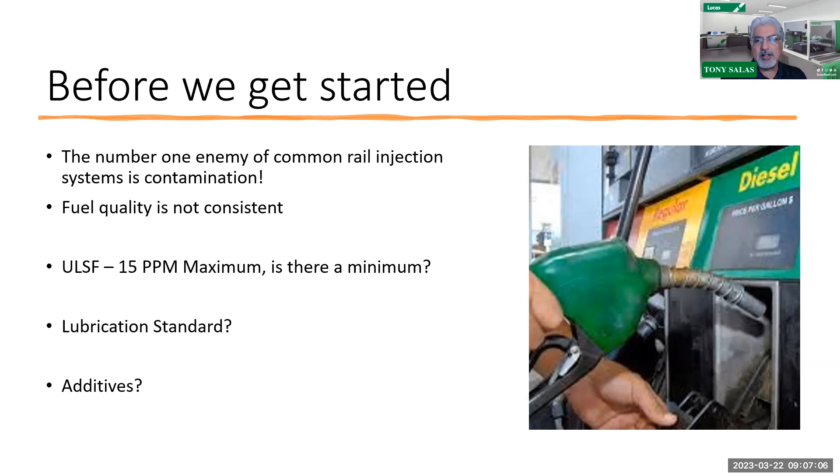When I get phone calls, I know pretty much everybody all across the United States, and it's amazing how one specific area will call me. It's been a while, but they'll call and say, 'Hey Tony, what's going on with these pumps or a certain injector?' It turns out it seems like a regional problem where fuel can be the issue. So take a look at your fuel quality. We have a specific gravity tester here where we test the specific gravity of the fuel. It's a good amateur test to get an idea if there's extensive water content in the fuel itself. So you come up with your own ways. If you want more information about that, let me know.

But very important to understand that fuel and contamination is an issue with the common rail system.

So when we look at the common rail systems we'll be discussing here, I only have so much time to discuss a whole bunch of systems, but we'll try to go through them.

Obviously, the first common rail I was born with is the LB7. I'm not going to lie, it's always been GM Duramax. That was my first. From there, we took the information from LB7 and carried on some of the test procedures, some of the things we can do.

In this case, we saw the common rail introduced in the '03 Dodge Ram on the 5.9. Then for Ford, we saw the 6.4 use a Siemens common rail. So Ford did not come on board with common rail, for trivia purposes, until '07 with the Siemens common rail. That only lasted a few years, 3 years. Then in 2011, Ford went with Bosch piezo common rail injection, but it was a piezo, unlike what we saw with the Duramax from LB7 all the way to LMM.

We saw them using a ball and seat injector, then they went to piezo in 2011. That's what we see with the LML Duramax. And obviously Duramax, as we discussed on the previous Lucas sponsored webinar a few months ago, we talked about the L5P Denso common rail. So in this case, we saw the L5P Denso common rail.

So a lot of changes, but when I look at a common rail system, it's all relatively the same to me. What I mean is there has got to be some kind of fuel supply - the fuel tank. We got to get fuel to the common rail injection pump, which pressurizes the fuel, moves that pressurized fuel towards the rail, and finally to the injector itself. The final destination is to be injected into the cylinder itself.

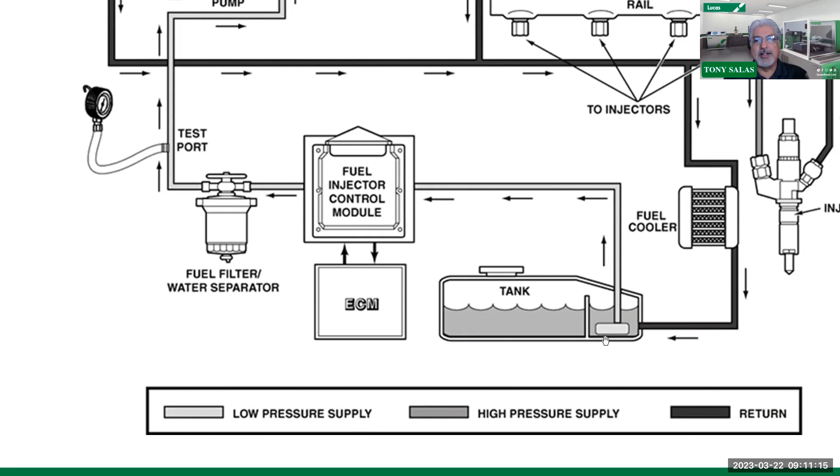Because if that filter's readily getting contaminated already, that means that we definitely have some debris in the tank. And those of you that work with the agriculture community probably know that it's amazing how even these tanks can get full of hay. So again, the fuel tank is very important.

So as I move around here and I look at the common rail system here, we see that we have our injection pump. And like we saw with the LB7, the CP3 pump was the injection pump at that time, used extensively through the years. And therefore, at that point, we saw the fuel going towards a junction block where we saw the pressure limiting valve and the fuel rail pressure sensor.

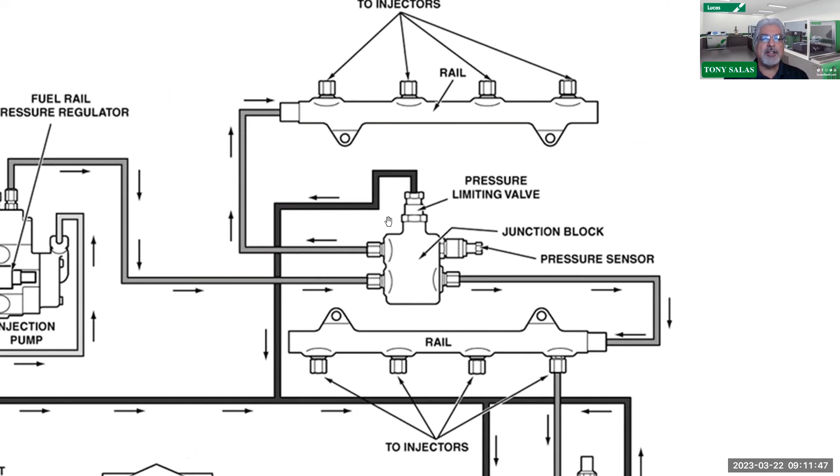But as time went along, we saw a change going on to that. But regardless, we saw that the pressure was distributed to each common rail itself. So the purpose of the common rail was, in essence, to provide the same amount of equal volume and pressure going to each individual injector. But we know that not all the injectors are working at the same time. It's one at a time, following a firing order.

So therefore, yeah, we did a lot of basics here. So bear with me. I know it's kind of basic what we're talking about, but we tend to misunderstand, some of us that are novice technicians that are not fully experienced, that we have a suction side, we have a high pressure side, and we have a return.

So the first thing we struggled with back in the day was, what happens when the truck comes in with inadequate rail pressure? There's not enough rail pressure. And in this case, it wasn't always the pump. It still happens to this day, because I talk to rebuilders from time to time, and they see quite a number of injection pumps come in, and the pumps are fine, they're just dirty or contaminated.

So the question begs, when the truck comes in and it's got low rail pressure, an apprentice style technician, or somebody who doesn't have experience with common rail, tends to want to replace the pump. But the pump does not fail as much as we think it does, depending which model we're talking about. It does not build any rail pressure, but they tend to forget that it must be built against the injector. So you're going to build rail pressure, you got to push it against something.

Now, when we look at literature from the Power Stroke 6.4 with the Siemens Common Rail, they were talking about disconnecting a line to see if there was contamination. So again, it goes back to that contamination not being just metal, but also other debris that might be in the common rail system.

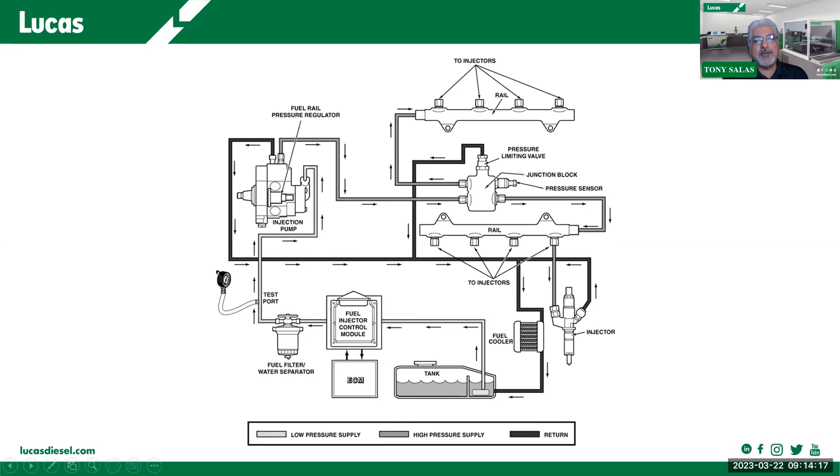But regardless, Duramax was known for the longest time to use suction all the way up to the LMLs. But when the L5P came out with the Denso common rail system, they added a lift pump. So therefore, Duramax was the king of suction, I guess you can say. So we were using this gauge to actually measure suction.

But since we're sucking fuel, one of the key elements that I still see from time to time on Duramax applications is the fact that the fuel cap is rather unique. In this case, you'll notice that this fuel cap is actually venting the tank at 1 inch of vacuum. So therefore, if we're pulling fuel, it is possible that we create a low pressure in the tank.

So what can happen is that it collapses. From time to time, I'll look underneath an older Duramax and I will see that the creases of that composite tank tend to be moist. And that's because the tank has been contracting, expanding, contracting, expanding.

But when it contracts, it's because it's drawing so much suction that in turn, it actually builds a vacuum in the tank. So the cap is supposed to be specified to open at 1 inch from GM itself. So the problem is when you put a locking cap on, many of them don't meet that specification.

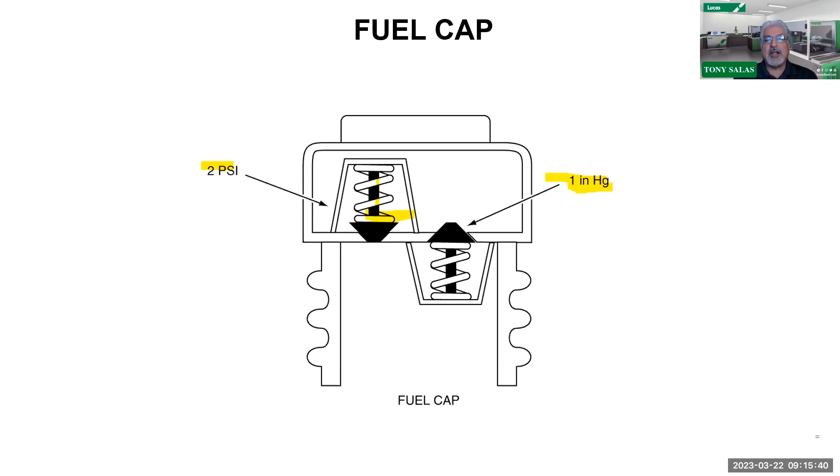Then on the opposite end of the spectrum, we see a return coming into the tank. So in turn, we build the pressure into the tank, which again can actually go up to 2 psi. So I guess what I'm trying to say is make sure we have the correct cap on these Duramax applications. Very important to understand.

But then as we move along here, we saw that the weakness of a Duramax also, again, from LB7 all the way pretty much to the LMLs, was this hand primer pump. And I've been teaching for years that, in the past, in the early years, we were talking about putting a clear hose, because even GM and their service procedures wanted you to put on these lines a clear hose to see if there was bubbles, if it were aerating.

But one of the tests that I found out is that, well, most of the time, not all the time, but most of the time we see that this hand primer pump will actually kind of be aerating the system and lose prime. It'll be one of those situations, you park the truck after some driving time, and then you'll come back 10-15 minutes later, you try to start up the truck and it won't start, and you have to prime it to get the truck running.

So that means we're losing prime there. So in many cases, what we do is we actually put a vacuum on this outlet tube. So here's the inlet coming in, then you got your outlet. And what we do simply is we actually get our vacuum pump adapter with the little container so we don't suck fuel into the vacuum pump. But what we do is we put it in a vacuum and see if it holds vacuum. And if it does not hold vacuum, then probably, or most likely, the issue is the primer pump.

And like I mentioned before in previous webinars, I no longer rebuild these anymore. It is cheaper to buy the whole assembly. Many vendors sell it, where it even comes with the filter, the water in fuel sensor, and the plunger pump. So a whole new unit. So I don't rebuild them anymore. Even though they still sell the rebuild kits from many different vendors, I'll just understand that that is a hot spot when it comes to losing prime.

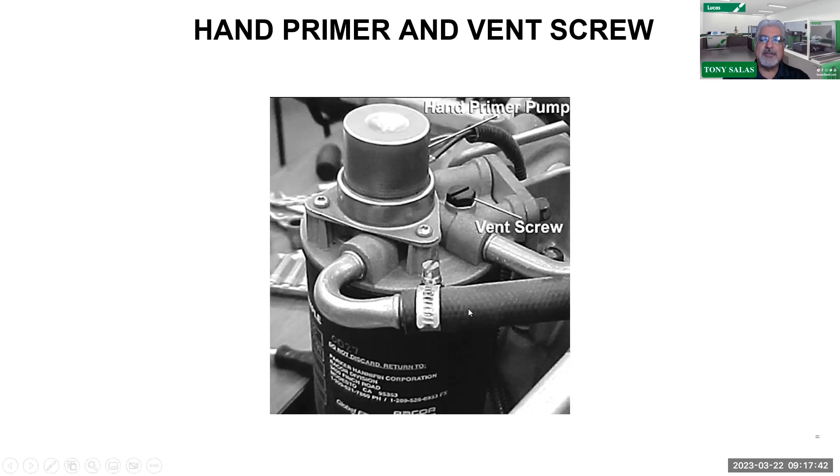Now, do me a favor though, in any Duramax application, especially from the LB7 to the LMLs, make sure you check these hoses. These hoses get old in time, and it's time to call your local GM supplier or whoever sells these hoses and actually go replace these hoses if necessary, because they can also become brittle and actually start to come apart on the inside. So definitely keep an eye on those hoses.

Now, as we see on later model Duramax, you're going to see that they're using a vacuum switch. So again, we're actually monitoring that suction. So too much suction again will mean that we most likely have a restriction.

Number one tends to be the fuel filter, but it could be other components. We could have a restriction on the pickup inside the fuel tank, but in this case, like I said, this tends to be the issue with the fuel filters.

Now, I know there's a lot of aftermarket fuel filters being sold, so since I'm not a GM person, I can say, hey, there's the CAT adapter, there's the dual filter adapters that you can get from FASS and other manufacturers, and AirDog. All I'm saying is, I believe this vehicle is under-filtered. When you look at the surface area to do water separation and filtration, we're asking a lot out of the stock filter from Racor. So it's a good idea to actually put a supplement filter if possible.

Now, I'm not going to lie to you, since we were talking about suction, when it comes to the LMLs, I will be honest, if I have a catastrophic CP4 failure on those, we will go ahead and add an aftermarket lift pump. I have my favorite, but in this case they do sell bolt-on pumps, ready to install just the pump. I don't need to install a big assembly, which is a high-dollar filter aftermarket assembly, but a good pump itself will suffice, and that could be in the neighborhood of $400 to $500. It's a lot cheaper than having to buy those big units that can exceed over $1,000.

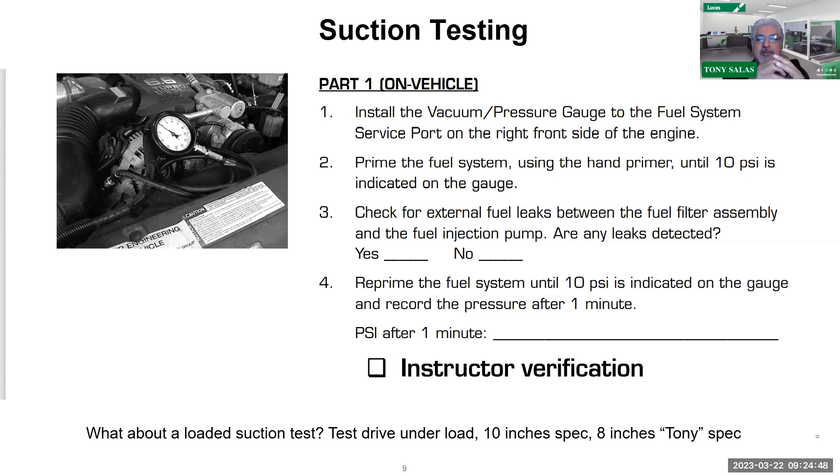Top kick Kodiaks, those early model top kick Kodiaks were notorious for that, where you pull the pickup, and they weren't using a pickup sock, they were using a plastic pickup container with holes in it. We literally had to drill holes on that plastic pickup because it was actually restrictive from the factory at that time. I'm sure there's still quite a few of them out there that even have trash on them.

But then on all these Duramaxes, all the way to LML, you're supposed to do a total suction test. On this LB7, they were telling you that you can disconnect, you can just leave the key off and run the starter if you want to do that. In other words, keep the key off, get to the starter relay right there in the engine compartment, and you can use one of those relays with the button on it.

And what I do is I will crank the engine with the key off, and what I'm trying to do is a total suction test. And what I'm literally doing is pinching the line that goes between the outlet of the fuel filter and the injection pump.

There's a line right there on the outlet line. I'm going to pinch it with some crimp pliers, and what I'm going to do is see what the total suction is, because I'm putting a major restriction with the crimp pliers, and at that point, I'm measuring the total suction, which should be minimum 15 inches. Some people say 10 inches. No, I get 15 inches. That's what you want to see.

So that'll tell you the total suction of that primer pump that sits behind the injection pump. That's what step number 7 is saying, is go ahead and restrict that line and crank the engine over and see what you get. So again, total suction test is what you want to do there.

So once again, we started off at idle, crank the engine, you start up the truck if your truck has a drivability problem, or a rail pressure code. And what you're going to do is you're going to measure again the suction, 4 or less. Then you go ahead and do a loaded test, 8 inches or 10 inches, whatever you want. And then you got your total suction test, where you're going to restrict the line on the outlet of the filter and see the total suction. How well does it suck? So this will be a crank key off situation that you're going to do.

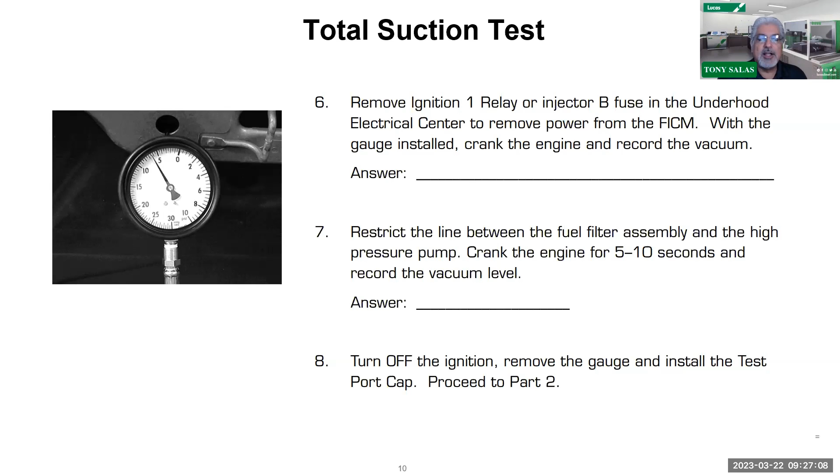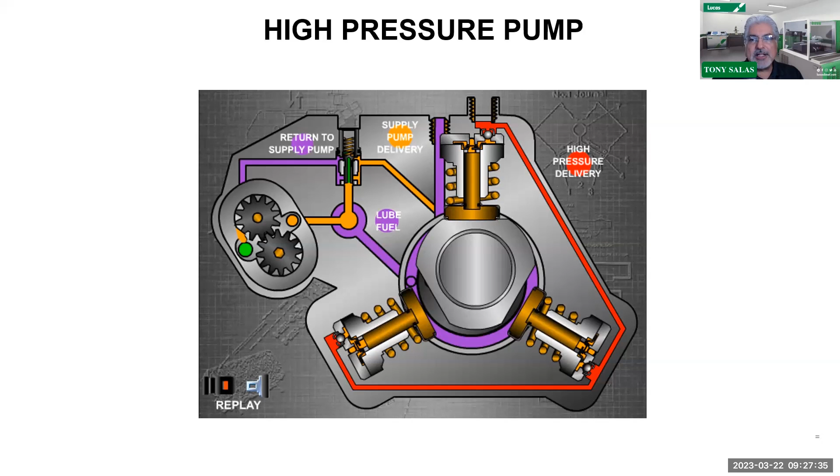So remember, there's got to be something that lubricates these CP3s, whether it being an LB7 Duramax, LLY, LMM, or even a Cummins 5.9 and some 6.7s. So the cascade valve maintains pretty much, as you can see here on this old slide, there's got to be lube fuel there, and that lube fuel has got to be maintained by the cascade valve. So that controls that flow.

So here you can see an early model CP3 pump, and there you can see the cascade valve. Unfortunately, on a Duramax application, it is not easy to get to. It is faced towards the passenger's head. So literally, if that's your issue, you're better off just replacing the injection pump. But on a 5.9 or 6.7 Cummins, yes, I can get access to them and I can actually replace them. So I am guilty of returning some cores without a cascade valve, because I'll steal them off of some normal good ones on some cores that I return.

But they do sell them though. The cascade valves are available by themselves.

Now, I got to be honest, for a lot of years in the early years, back in 2010 or earlier, we used to do injectors and stuff, and we never replaced the rails. But after some time, back in the day, we started sticking our borescope into the rails, and it was just astonishing how much rust and crud there'd be inside the rail. So we inspect the rails, but for the most part nowadays, on most applications, we actually replace the rails too. So if you're one of those guys like me that didn't replace those rails, it's a good idea to inspect them at least, because there are orifices inside of these, especially on the Bosches. You're going to see that there's an orifice, and that orifice is a dampener for that pressure inside those rails, and they can actually get dirty or clog.

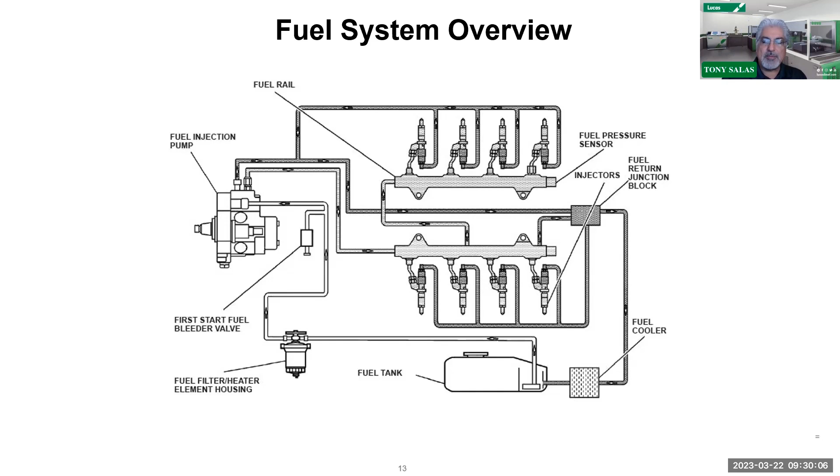I just got a phone call about 3 months ago, back in January, from a guy who was perplexed because he couldn't understand why one side, when he did the power balance, was way weaker than the other side, and the truck had power problems and a very low boost. I told him this might be a long shot, but take that rail off the driver side and inspect it. Sure enough, he sent me pictures, and it was clogged. Being that it was a 2002 truck, that's almost 22 years of debris accumulated in those rails. So always remember, the age of these common rail systems could be a problem.

Now, the fuel rail pressure regulator has many names depending who you talk to, whether it's an FCA, an MPROP from Bosch, or FRPR from Duramax. But this is the guy that controls the rail pressures, which we often call the volume control valve. It's a wise idea to understand how these things work, because they're pulse width modulated by the computer on the ground side, so they work on a pull-down circuit. It controls the fuel supply to the plungers themselves to generate the rail pressure. So we see our fuel supply pump to the high pressure plunger. It's a volume control.

But let's not forget, guys, that this is a great tool to inspect how your fuel system is, how clean it is. So from time to time, we take them off, like on a 5.9 Cummins, and we'll see if they're full of debris or what's going on. But the most important thing I need you to understand is that all fuel being delivered to the cylinders must go past this fuel pressure regulator. So all of it must go past it.

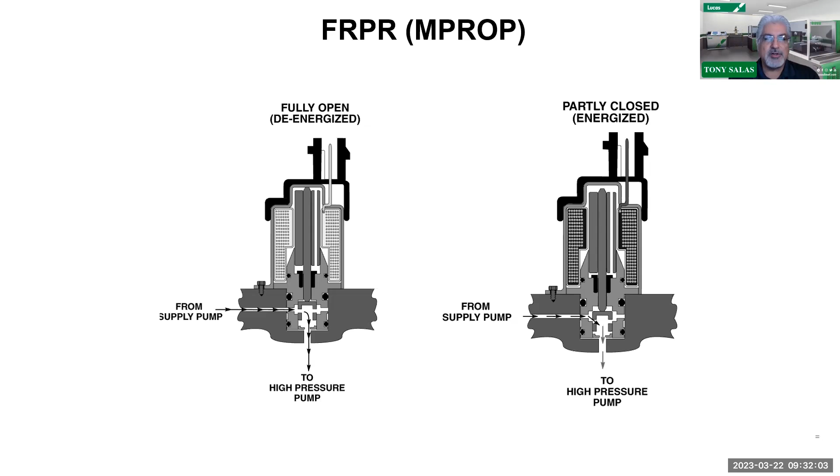One of the key things we talk about when you diagnose, and other instructors have talked about too, is look at your duty cycle of your FRPR or FCA, whatever you want to call it. The magic number was somewhere around 30 percentile, so you want to be in the 30 percentile region, 32, 34%. You could look at that percentile when the engine was at operating temperature running, and that would tell you the duty cycle of this guy, because if it was too low, he's having to deliver more fuel, which means you possibly have excessive return. So it's a good preliminary telltale to tell you if this fuel system was starting to see excessive return.

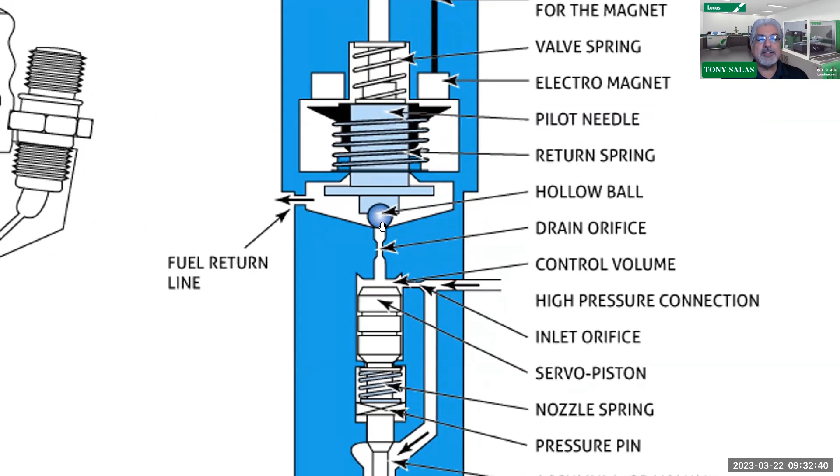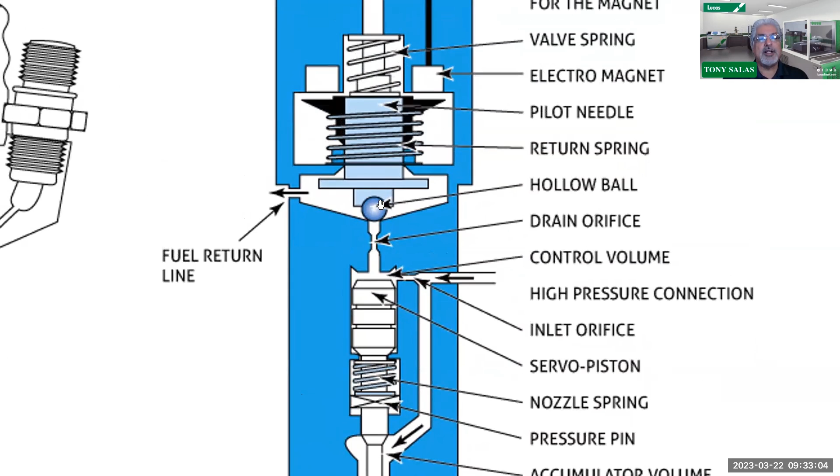Yes, I know about the orifices, but in this case, we also send fuel rail pressure to the bottom of this nozzle assembly. At that point, this coil or solenoid is going to be energized, and once that coil is energized with a higher voltage, whether it's the early years 90 volts all the way to 48 volts, its only job is to solely unseat this ball. The ball is unseated, we create a pressure differential. So pressure drops because pressure is relieved to the return, as you can see here. So it's a pressure differential game on most common rail systems.

What moves the nozzle to open and close is actually the dumping of pressure above the nozzle. So how do we dump it? We go ahead and unseat the ball and it goes to the return. In the early years, we were having chronic problems.

We see it from time to time, especially with crappy reman injectors. That's why I tell people, be careful what you buy in today's common rail injectors, because you pay for what you get, because we don't know how well they're servicing that ball and seat. You've got to watch out for this, because we get ball and seat erosion. This is where that lubricity thing we were talking about, and contamination, can play havoc, because I feel the weak point of this common rail injector is the ball and seat.

So in this case, we're only trying to create a pressure differential where the pressure drops above the nozzle. The pressure below the nozzle is going to push the nozzle up and inject fuel. That's the way it works.

Now the question begs, if I have low rail pressure - now we're talking about Duramax and Cummins applications here, so we're covering a lot of territory when I talk about this - in this case, what I like to do, I'll tell you what Tony likes to do.

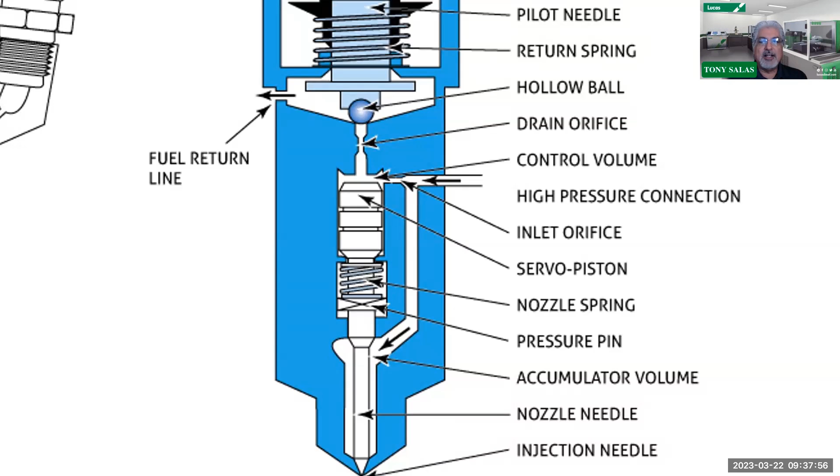What should happen is you snap the throttle, RPM should go up and then come immediately down. So in this case, if it takes forever to drop, a steady time to drop, that means you do have ball and seat erosion, because it's holding the nozzle open longer, which in turn is fueling longer. That's why, so that's what you're going to see. So just snap the throttle and see how fast it drops. If it takes too long, I'm almost 99.9% positive it's ball and seat erosion on those injectors.

So I know that for many, they're actually not putting these tubes in correctly and torquing the injector properly. So therefore we have some leakage there. So when I do a leak down test, they fail, and most likely it's not the injector sometimes. Yes, it could be the injector, don't misunderstand me, but it's actually the tube itself. So we've got to inspect these tubes to see what's going on—they're not correctly installed, they're cocked a little bit, or those injectors aren't torqued properly. So therefore, yeah, you want to inspect those tubes.

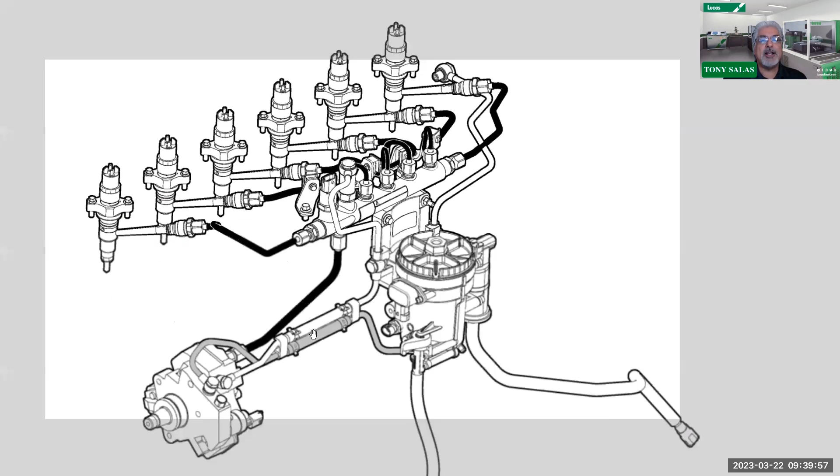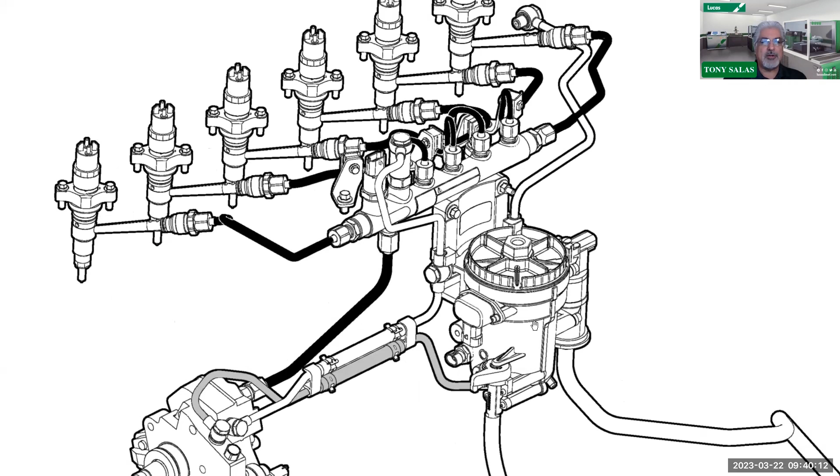But this is an early model 5.9, probably an 03 that I'm looking at, because right on the back side here—I don't know if you can see my cursor—that's the original lift pump location. The lift pump was originally on these trucks on the filter itself. Then with the change in filter styles and so on, they actually went with the pump in the tank. However, I have run into some trucks where the lift pump is in the actual chassis, somewhere on the chassis or frame. So it can be in one of three places depending on the years and model of these 5.9s, so they can vary location.

So what is nice about a 5.9, like I told you already, the Cascade valve is easy to get to on the injection pump itself.

Now I often get lessons from shops. I once visited this shop, and this old gentleman was working there. He's great, smart. We got along great.

We hit it off great. I actually had too many beers that day.

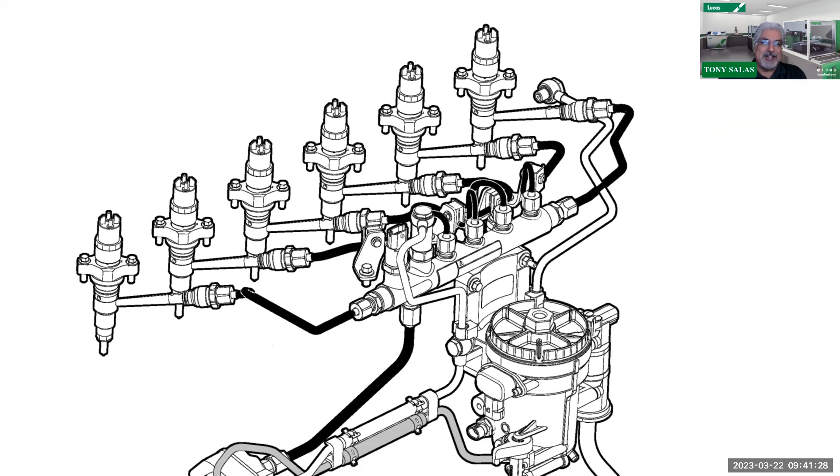I asked him, how in the hell are you testing these common rail injection pumps since you don't want training? He goes, well Tony, what I just do is I got an adapter for this banjo fitting in the back. I cut it up and put it to a hose, disconnect this, and put a separate banjo fitting to a glass of water through the hose. Then I disconnect this line and put shop air through there with my rubber tipped air gun. If I see bubbles coming out, then I know a ball and seat or a tube's leaking. I'm like, son of a gun, I guess that works. But now we got to figure out which one is the one that's leaking.

He came up with something good, because a lot of us are anti-return tests because it takes so much time and adapters just to do a return test. And even then, you got to cap it to see which makes a difference in your return flow. It's just too time consuming. So we're big leak down tester guys. That's what I teach in those diesel master courses we do. So again, be careful about that.

For those of you that never noticed, let me go back to my 5.9 here. For those not very fluent or new to this, note that the passage for the return and the tube are all in the same passage. That's why you're wondering, okay, if the tube is leaking, why don't I ever see it? Because it's going into the return, you'll never physically see it there. So food for thought there.

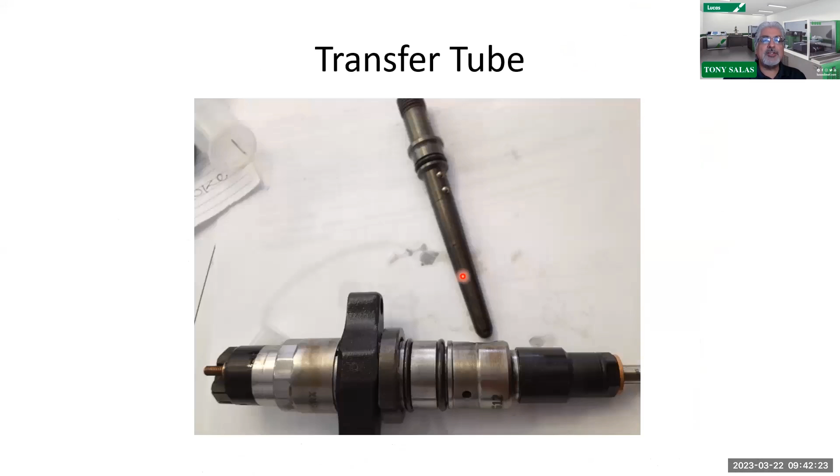So that's what you're going to see. Yeah, there we see our transfer tube going to the side. There's a return hole where the return fuel comes out of this injector.

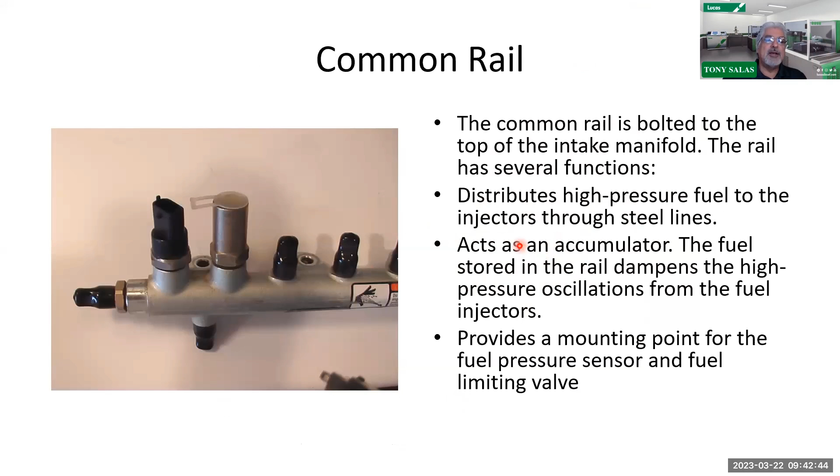Now the common rail itself, as I mentioned already, acts as an accumulator. Like I told you, there are orifices, especially on the ends on these early Bosch ones, where you're supposed to check the rail, see if that orifice is dirty or full of crap, because that'll affect things. But it is there as an accumulator. So please note that's inside the common rail itself.

So as I switch over to the Cummins 6.7, number 10 is the biggie because that tends to be an issue even to this day. I thought we were over it, but now we get them from time to time. Number 10 is actually your pressure limiting valve. You can lose fuel rail pressure right there at the pressure limiting valve.

In this case, I'm going to tell you what I do. I no longer replace them, I cap them. Different aftermarket companies like PPE and others now sell these caps, which are just plugs that pretty much eliminate the pressure limiting valve. Why? Because if the truck sees excessive fuel rail pressure, it'll be detected and it'll derate the truck or shut the truck off completely.

So they're just such a pain in the butt because of contamination. They will hang open and actually relieve fuel rail pressure during normal idle times or loaded times. It's not supposed to pop open so easily. In case you don't know what I'm talking about, these pressure relief valves were initially set to open around 27,500 to relieve excess pressure in case there was an incident where we had no control of fuel rail pressure. But like I said, the system monitors itself, it could shut it down on its own. Even if there was a fuel rail pressure sensor failure, it could still shut itself down.

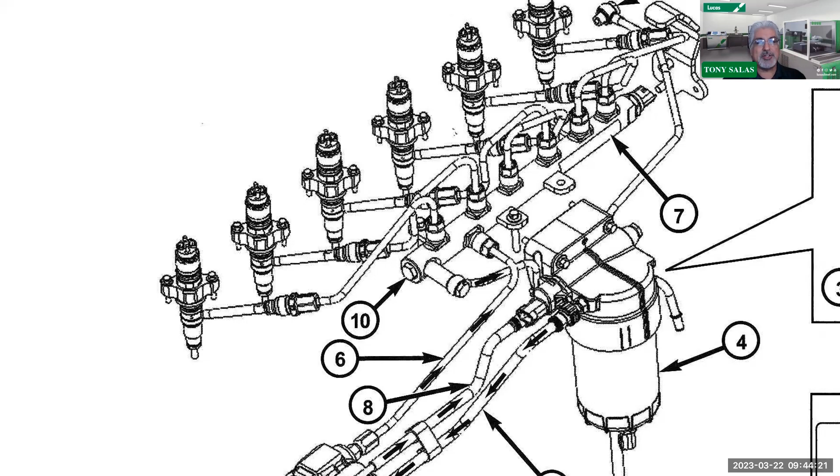So I'm pretty much a big believer now that I just go ahead and cap them, or in other words, plug them. I just put a plug there because of the issues we've had. And you got to understand, we have some customers that do poor maintenance, even though I'll yell at them and tell them to bring that truck in for maintenance, and they can't just let go of the truck because they need it so bad, but that happens.

So anyways, that's what we see. One of the things, if you work with Cummins on these Ram and Dodge trucks, is how many fuel filter part numbers are there? My God, there's so many.

There was a spin-on, a cartridge, a top lid, and whole different styles of them through the years of all the Ram, both 5.9 and 6.7. So if you try to stock them all, it was a pain in the butt. There was always one that we needed, I had to get it. But in this case, yeah, the fuel filters.

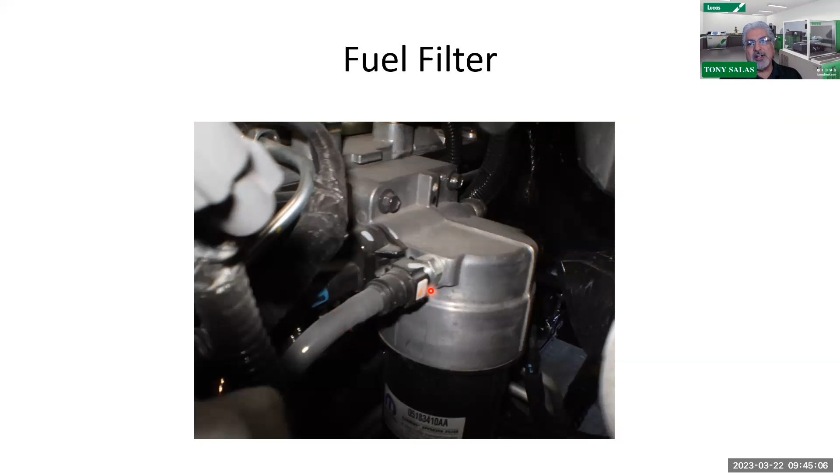One of the things you need to understand is that Cummins was not so great, because the Duramax filter we saw earlier was rated at 4 microns, while these were rated on the early models at 10 microns. They finally started to drop the micron rating, but they were not very good filters on the early years compared to the later years.

So if we look at the 6.7 on the Ram Cummins, we saw that they're putting a primary filter now underneath, close to the spare tire underneath the truck. So don't forget, those of you new to this, that there is a primary fuel filter now on Ram Cummins since 2013.

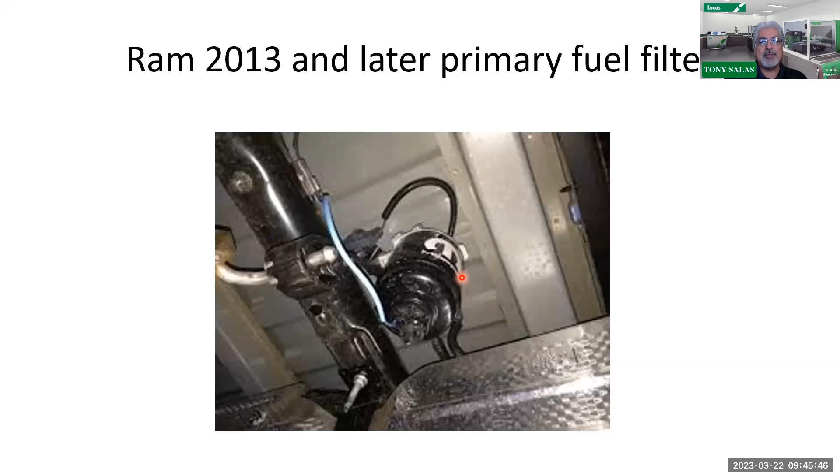From time to time, we get customers bringing them in saying, hey, I didn't know there was a filter there. I saw the one on the side of the motor, but I didn't know there was one on the bottom next to the spare tire. So please be aware that Ram Cummins has gotten really good about their filtration system. Here you can see the one for the 2013 and later models.

Now, we said earlier on the FCA that we wanted to see 30 percentile, like I told you already. And I told you that this unit is actually controlling the volume of fuel going to all the cylinders. So it's to your benefit on the Ram Cummins, both 5.9 and 6.7, to remove it and inspect to see if you actually have debris.

Now, there is no great test pretty much published for these 5.9s and 6.7s for a rolling idle. It's to the point that now I have a spare volume control valve for these applications, because the truck will come in and the idle, we call it literally a rolling idle. Our RPM will go up and down and up, it's not a steady idle. That's usually indicative of this sticking.

Now, if the truck's been deleted and has an aftermarket tune, that could be an issue too. I've had that happen to me where it was the tuner doing it, not the actual fuel control actuator you can see right here. So bear in mind these can actually cause rolling idles, meaning they're starting to stick. There's nothing you can do with them. I know in some other places they tear them apart and fix them, but most of us don't do that, so they can get sticky.

But if you do have a rolling idle, I hate to say this, but for what we get these cheap, you're better off keeping one in your toolbox and put it on just to see if your rolling idle goes away, because there's no good conclusive test with the scan tool that'll help you know if this guy is sticking. You could look at duty cycle of it, but I haven't been able to get good concise information from it, unfortunately.

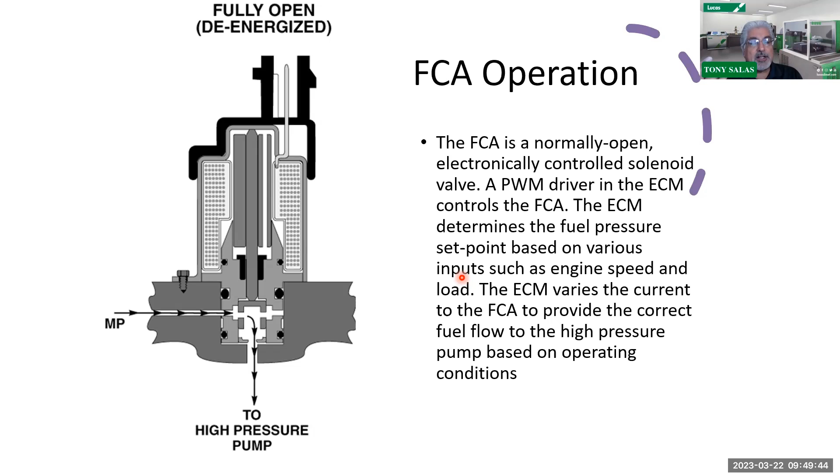You could have done it on some of the LB7s and LLYs too, because some of them did that as well. So that worked if you get a situation where you're getting dilution of the oil on these model trucks.

Now the fuel rail pressure sensor is a critical sensor on these Bosch applications, and it's proven to be very reliable. But I'll be honest, on 6.4 Power Strokes they have given me issues. If you've seen my diesel talk on Tony Salas' YouTube, I show one on a 6.4 — yeah, they're not very good.

So we keep a spare one for the 6.4 as well, because they have been known to be biased, meaning the voltage hangs in a certain threshold. But I've got to be honest, on these Bosch applications that has not been the case. And looking at the Denso L5P that we talked about a few months ago, you found out that pressure sensor is also iffy. So it's been a problem.

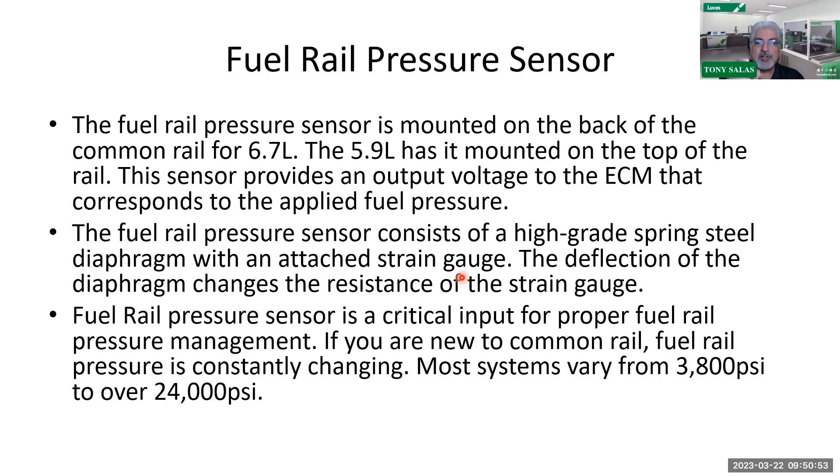But note that rail pressure sensor is very critical. Do me a favor on the 5.9, 6.7s, well, all of them really — when you're looking at rail pressure, and I'll show a graph real quick here in a bit, look at desired, look at actual rail pressure, but also look at the fuel rail pressure signal voltage. Make sure that signal voltage is not biased or sticking at a threshold, because it could actually cause issues.

We have seen crazy things happen very rarely on these, but just note this fuel pressure sensor has a range between 0.5 to 4.5 volts. So if in doubt, you can back probe this sensor with a meter or scope and watch the analog voltage signal go up and down, from 0.5 to around no more than 4.5 under full load, and see what that voltage is.

Because if that voltage is skewed all of a sudden, that means you've got an issue going on, which can cause an odd idle or acceleration problem. Hell, it can cause cylinders not to work, believe it or not. So it can cause an array of different issues.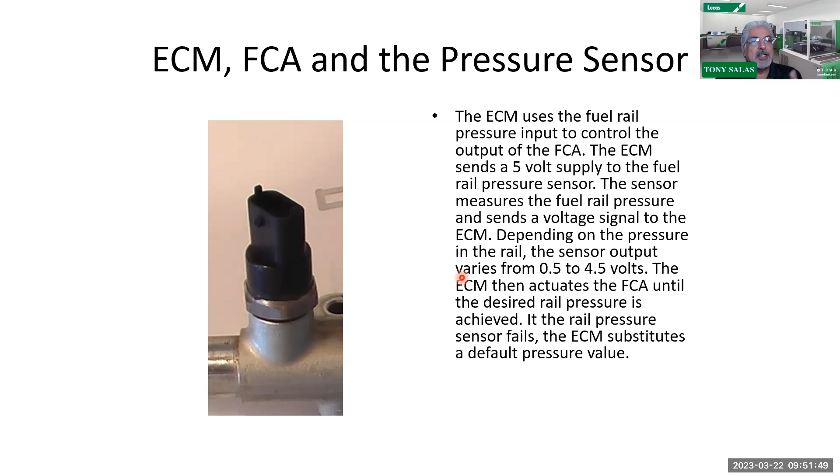And this is directly from the book from RAM. It says, like it says on the bottom of the slide, if the rail pressure sensor fails, the ECM substitutes a default pressure value. And the only way you know you've got that default value is by looking at that signal voltage off the sensor. So always look at that on these applications. That's why — here's an early slide I found, and in this case the reason why is because it was on an '08.

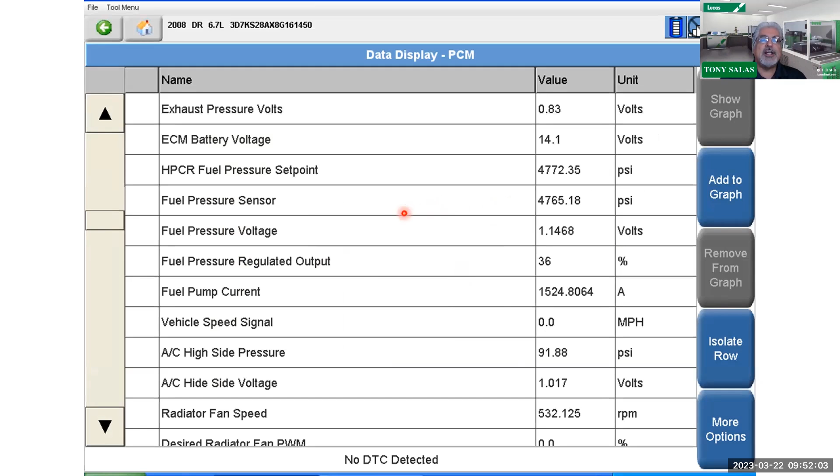And in this case, you can see the fuel rail pressure sensor reading. You could also see the signal voltage right there. So always look at that signal voltage, see what's going on with it too.

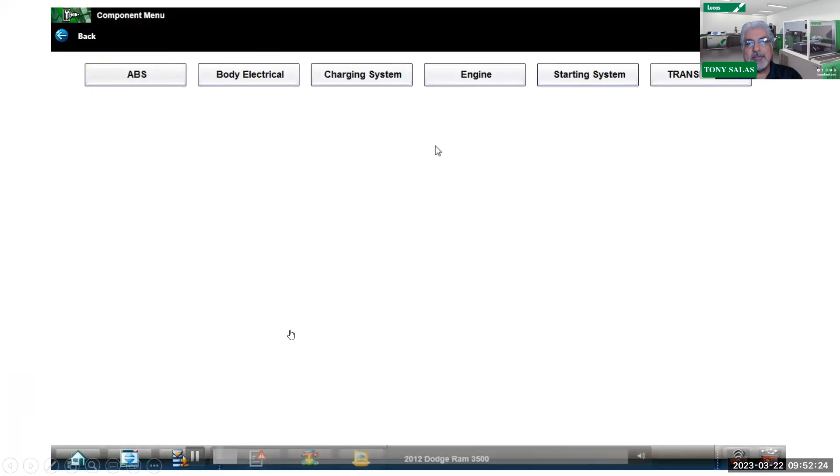Now I also like to show what's available. You guys got a lot of tools to use. For example, my Snap-on tools here, and I'm not advertising for Snap-on, but it's a tool I use. In this case, there's a feature that tells me how to test that fuel control actuator, the FCA we just looked at, also known as the MPROP. It tells me how it's actually routed, shows me the pin connector. Pin 1 is the on and off signal grounding, and pin 2 is your 12-volt supply. So I should see battery voltage going to it. It tells me how to do the test properly.

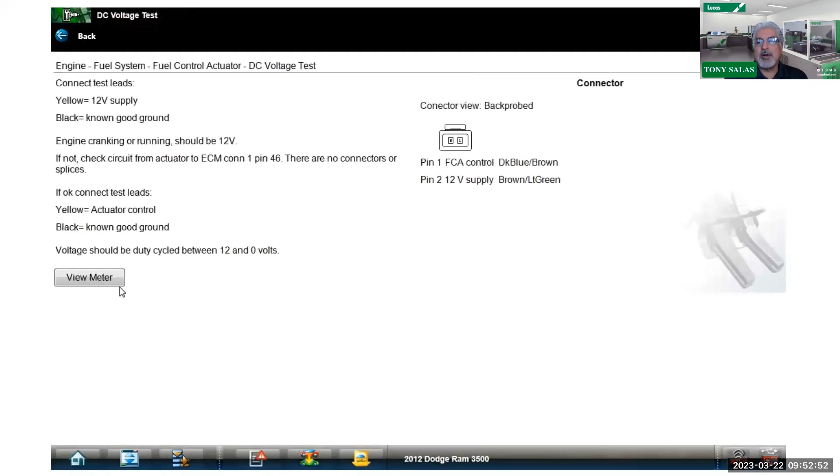And it also sets up the meter. I've been using this tool for years. This is my Verus, now I have the Zeus. I'm spoiled rotten with it. But in this case, it makes it easy for me to test voltages, see what's going on.

So guys, I understand some of these Duramaxes and some of these Cummins are getting old, so it's a wise idea to inspect those pigtails, see how they look. They can get beaten up through the years, fried, the connectors, lock connectors. No zip ties. So replace those pigtails as necessary.

And I get frustrated when guys call me or I see situations, guys posting their headaches, and they're not reading the code itself. Sensor high means what? It's on the high side of the circuit or the low side of the circuit, whether it being ground or whether it being the positive potential.

Understand that's electrically speaking. So one thing is electrically speaking of the component, and the other is the pressure, and that's what we see next: fuel rail pressure too low or fuel rail pressure too high. But then you could have circuit performance, meaning that maybe there's too much cycling of this pressure, so he cannot differentiate whether it's a fuel rail pressure problem or an electrical circuit problem. Regardless, your job is to inspect all the different aspects of the sensor or the system itself.

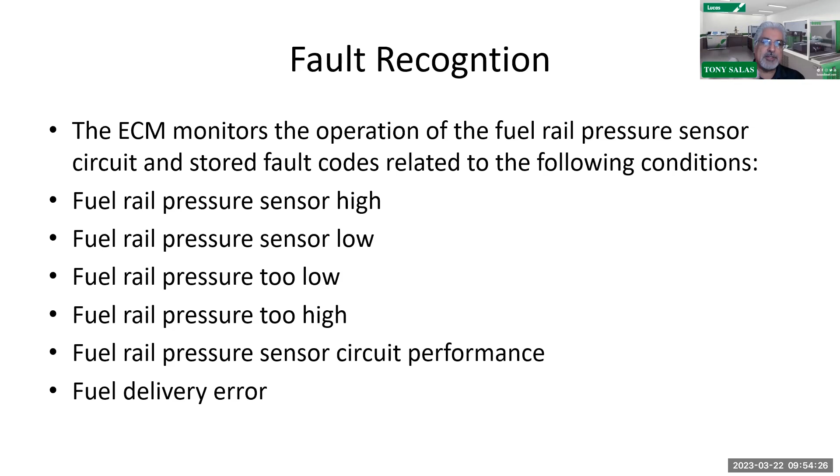So there's got to be some structure how you're going to approach this. But in this case, just note what the codes are telling you. Not to mention you can get a fuel delivery error, but usually that's accompanied by another code that's telling you more specifically what's going on.

But don't forget, as you look, for example, on this old 5.9 common rail, there is a pressure relief here. So like we just mentioned on the 6.7, there's one for the 5.9. Yes, the Duramax has them too. So the pressure relief valve can be something that's leaking.

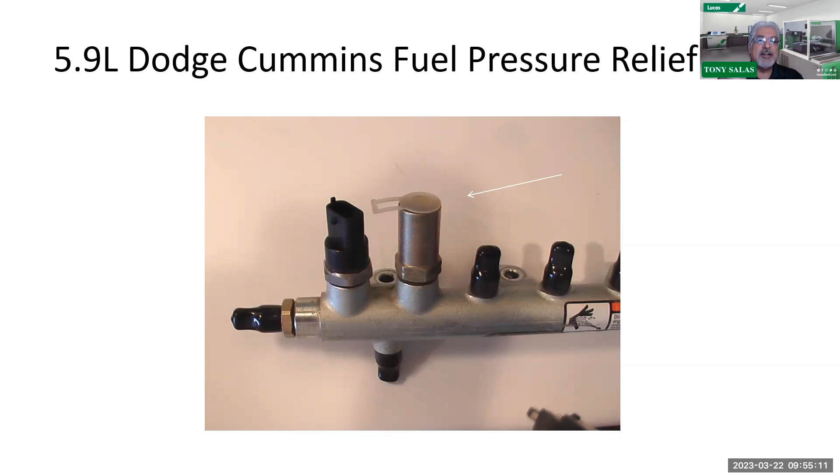And by the way, when you inspect these like this old 5.9, you take the banjo fitting off right there where that white line is pointing to. Please note, when you do a cranking test, you want to see if it leaks, there should be nothing, no moisture, nothing of fuel there. If there is small moisture, that means that thing is leaking and it has to be replaced.

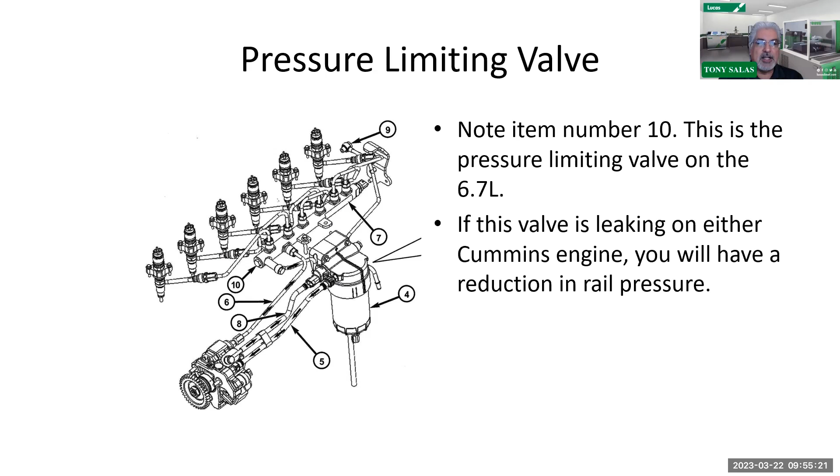Or like I told you already, I like to plug them. So that's something you want to do. Again, nothing should be there. And here's the one like we showed you off of number 10 on the 6.7 of the pressure limiting valve.

A quick side note here is the water in fuel sensor. Please note the water in fuel sensor is a critical player because, again, it does tell us what's going on. It's also accompanied by the fuel heater on some of these models, so please note about that too. But the water in fuel sensor, take heed to it because, again, that can give you a more indicative sense of what's going on.

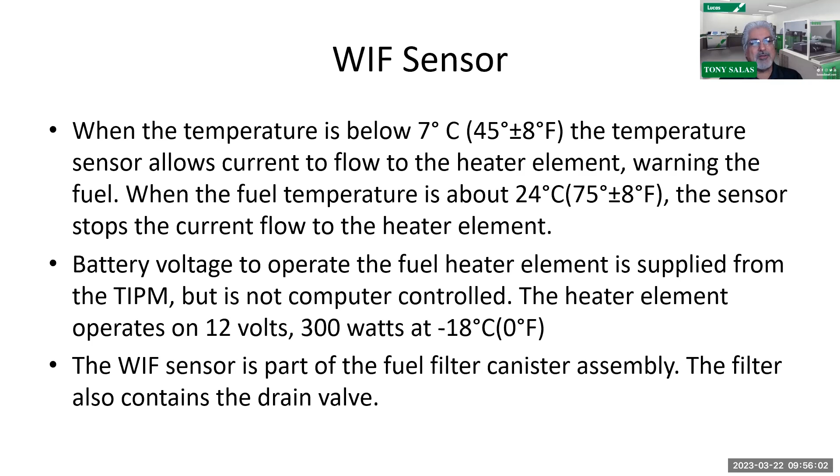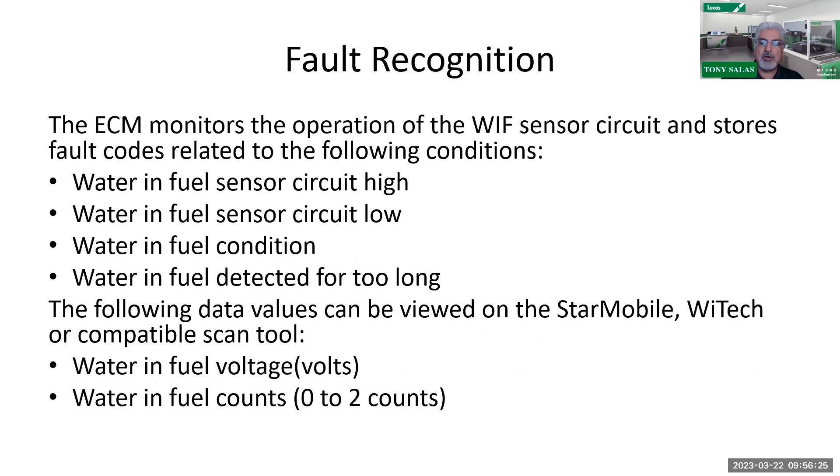If you do have water in fuel indication, don't just drain it. The question is if there was a substantial amount of water collected in the filter, how much is in the tank? You may want to keep an eye on it, or it might justify pulling the tank down to check the water content. Here you can see a Cummins 6.7 with codes set for the WIF sensor, showing water in fuel sensor circuit high, circuit low. This is now scrutinized on many applications where you'll get codes related to the actual water in fuel sensor, so keep an eye on that.

So as we're finishing up here with the CP3 and moving on, there's your Cascade valve, there's your FCA, and there's that transfer pump we were talking about.

For those who don't know, I've been known from time to time on the 5.9 Ram Cummins trucks, not so much on 6.7s, to put a Duramax style primer pump system on it. I got rid of the pump in the tank and essentially made it a Duramax setup on the Cummins, sucking fuel because the Ram Cummins has that same transfer pump, so technically it didn't need the lift pump on those applications - it could pull fuel from the tank on a 5.9. I've done that, and a few of my customers are still running that way, so it works with no lift pump.

But please note, some of these 5.9s and 6.7s can trigger a code if that lift pump is removed or disconnected, so you're going to have to get creative with resistors. Be aware of that.

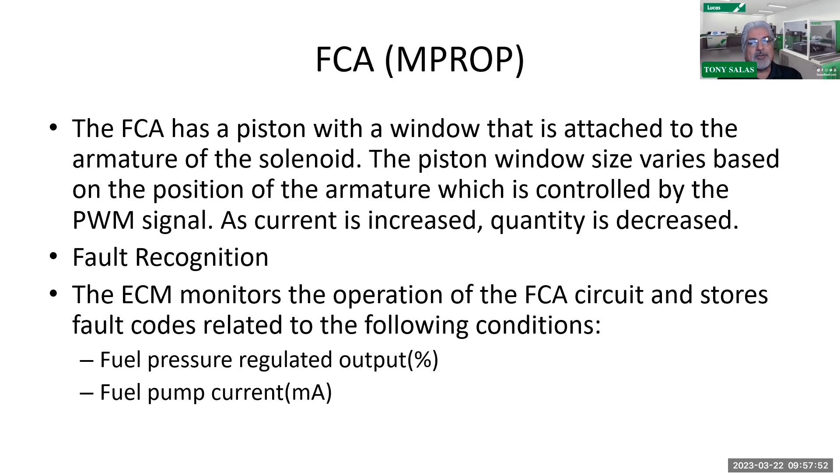Then we talked about the MPROP - what did I tell you the duty cycle was? Somewhere in the 30 percentile, remember that. For diagnostic purposes, the ECM itself on these applications is also monitoring the fuel pump current as well.

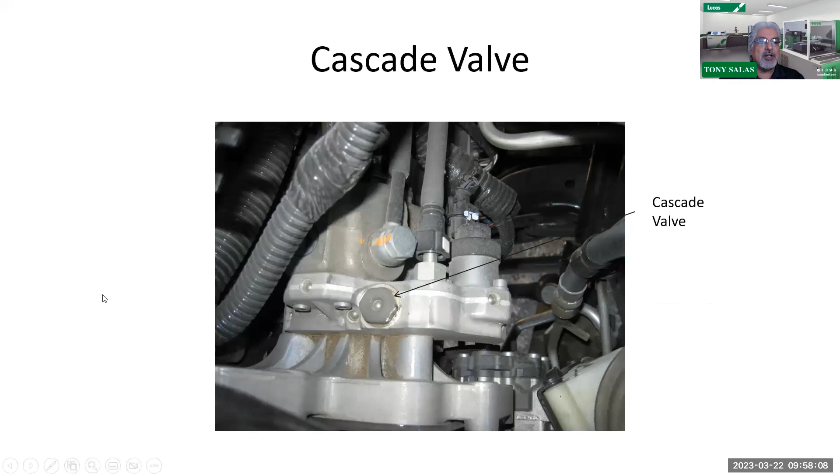Pretty cool. There you can see the later model 6.7 Cascade valve, easy to get to. Hey, you can tell this is a Las Vegas truck - you know how you can tell? Because look at all the sand around it. This is our thing here, the wind blows up the sand, so this is definitely a desert truck, as you can see there.

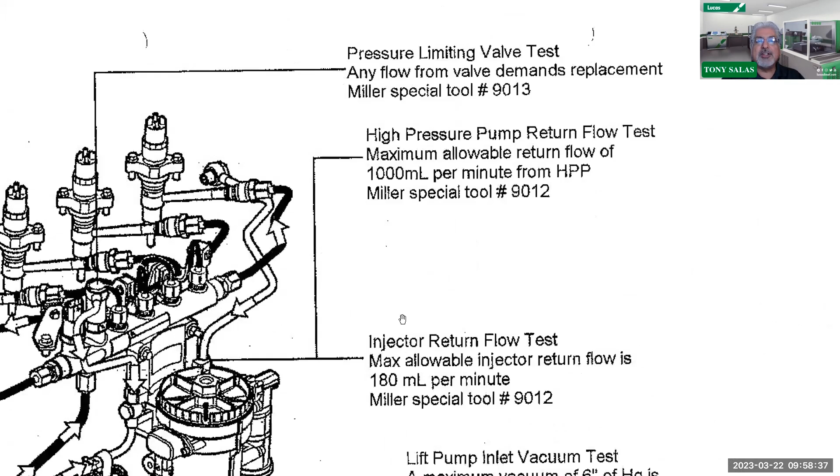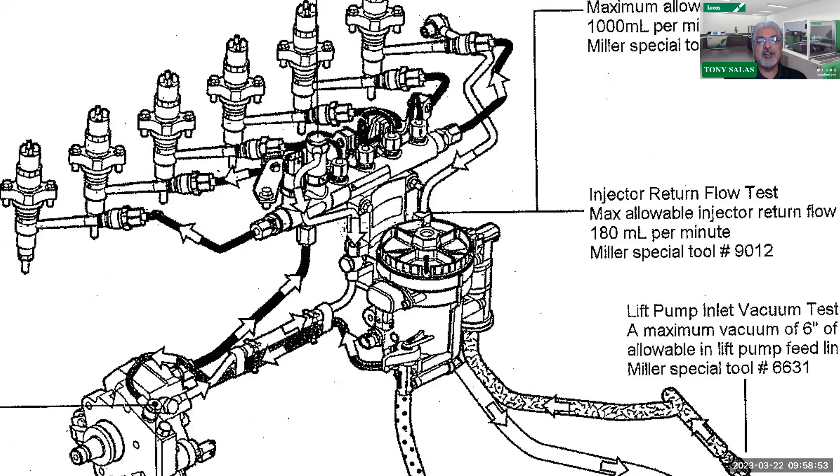So we talked about the Cascade valve, and here you can see a chart Bosch put out years ago. Here's some spec you can work with - there's your high pressure pump return flow test. This will tell you if the Cascade valve is leaking. You're literally going to do a return test coming off the pump itself. The allowable return according to Bosch is 1,000 milliliters per minute - that equates to 1 liter. So if you exceed 1 liter in 1 minute, that means you've got a leaky Cascade valve. That's how you test a Cascade valve on those applications.

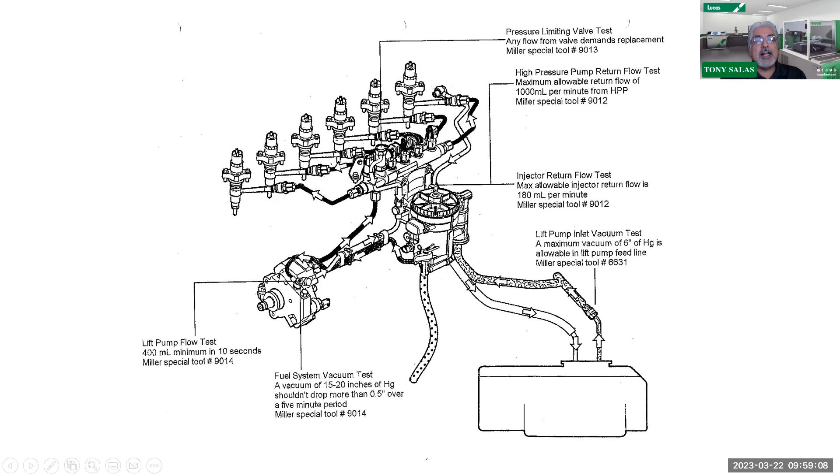We said earlier on those Duramaxes from LB7 to LML, we can prime the pump, see 10 PSI, and watch the rate decay. But on a Cummins application, we can actually measure the return flow, and honestly that's about the only return test I do on these Cummins applications, because like I told you, I do the leak down test as well.

Moving ahead, we see the IQA codes. Please note that the IQA codes are actually important - got to program them in. You may have gotten away with it not triggering a code, but remember this is a fine tuning device. I know Cummins 6.7 got rid of them after 2012, 2013 - they got rid of IQA codes.

So therefore, there's no programming in the injector. The computer can actually adjust the fuel trimming on this. But even on the new L5Ps, we still have those Denso common rails where you have to program those IQA codes. So do me a favor, program those IQA codes.

Now on the Duramax application, let's say an 06 LLY, LMM, LBZ, those actually have a backup copy of the IQA codes that goes into the glow plug control module.

The popular phone call I get about that is, hey Tony, I'm able to program the IQA codes, but it gives me an error code. It won't transfer over to the glow plug control module, because those of you who don't know or never done this, yes, you program the IQA codes to the ECM. Then with the scan tool, you transfer that file over to the glow plug control module. So it's a backup copy.

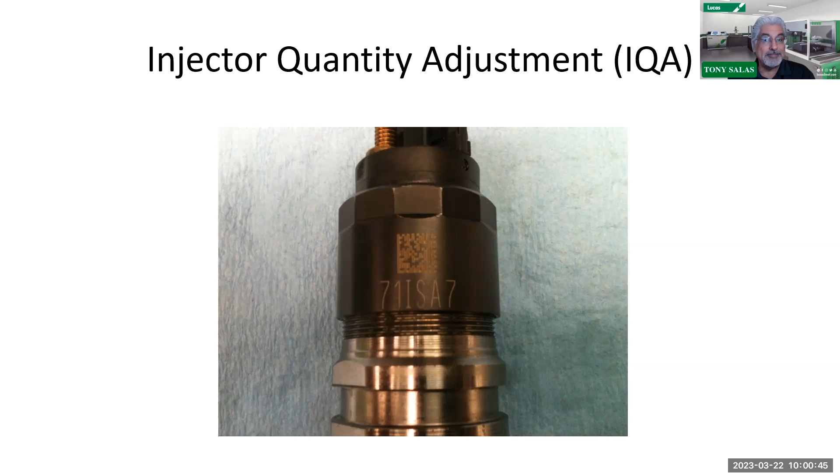But if they don't sync, they don't want to sync the IQA codes on both the glow plug control module and the ECM, the way I've been able to fix it is I had to reflash completely the glow plug control module along with the ECM. So something to keep in mind when you're dealing with those models.

So in this case, we see that we got a high return, we have a return coming out of the injection pump that supplies the fuel. But unfortunately, crankcase fuel tends to be dirty, so we see these injectors from time to time get clogged. Therefore, it won't run a decent regeneration.

So in this case, please keep in mind, do a good job of putting that banjo bolt on, because we've had quite a few trucks come in, whether with the CP4 or a retrofitted CP3, where they don't tighten that or don't change the banjo gasket, so it comes in with a fuel leak. For me to get that pump out again is mega labor. So please keep in mind that when you're putting that banjo bolt back on, or that fitting back in, that you actually seal it correctly, because you don't want to go back into it, you'll wind up with a leak.

So please be aware of that, because we've gotten a few of those, and even the shops next to me have gotten them too, and they're not happy because they've had to go ahead and reseal it, and that's a lot of labor.

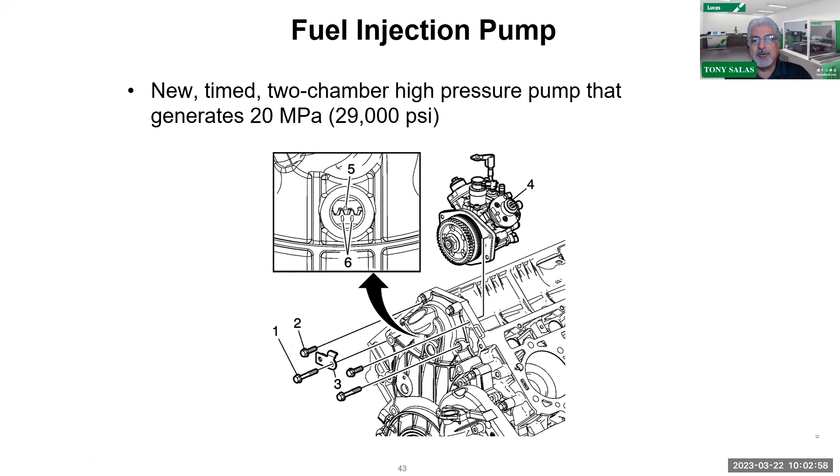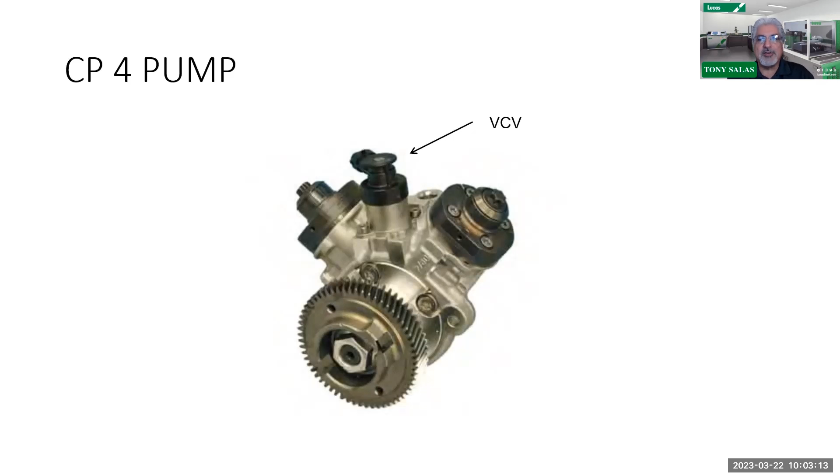So these systems are now capable of hitting 29,000 PSI. We talked about the CP4s in the past, so those of you that attended my training know this, but in this case, please note that the VCV is one of the places where you can remove to inspect to see if there's contamination. Some of you have put contamination kits in them, that's fine with me, but just understand that fuel lift pump pressure and volume are the key, which I'll go over in a second as I get into the common rail piezo for the 6.7 Power Stroke.

Now, the Power Strokes have now come up with new stuff. You've heard me talk about it in the roundtable.

The biggest issue we're having right now, especially with those trucks that do a lot of idle time or low speed, a lot of hours in other words, those are the ones we're starting to see major erosion of the injector nozzles. But also we're starting to see them break down internally, which in turn sends compression gases into the common rail system.

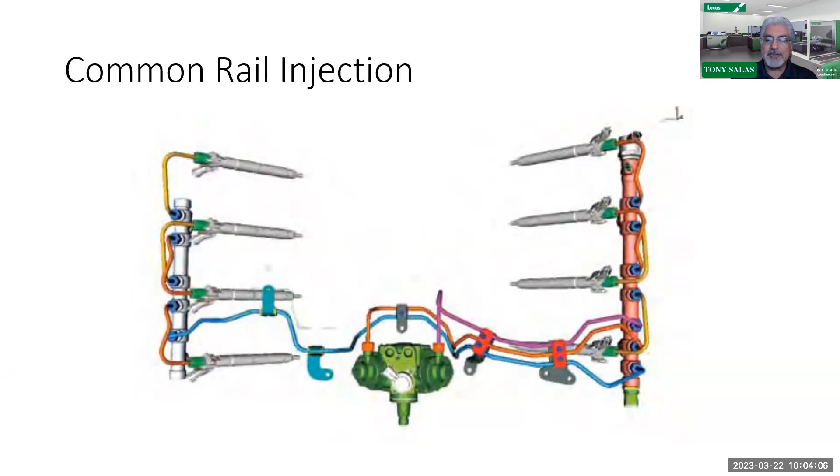So it's pressurizing literally the common rail system, so we have to know how the system basically works. Obviously we have the same components like we saw before, from the early to the later model Power Stroke 6.7s. Number one being our fuel pressure sensor. We see the fuel lines, which are not reusable. We're seeing the injection pump, which originally came with the CP4. And in this case, those are the injectors themselves that we see there.

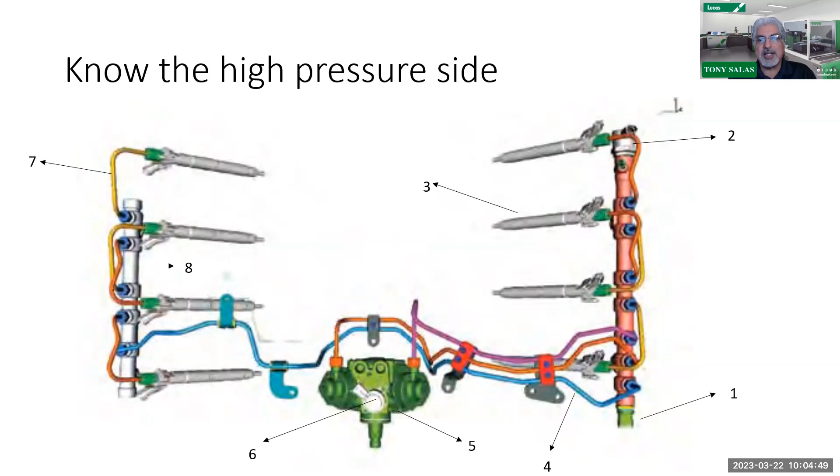But then up there on the upper right, we're going to see the pressure relief valve. Nope, it's not a pressure relief valve, but it works like one. It's called a pressure control valve right there. So like we saw in other common rails, we saw a volume control valve and a pressure control valve on the rail. One controls low pressure volume of fuel, the other controls excess pressure. So it's on the high pressure side, as you can see on the upper right, on the back side of the rail on the driver's side.

But in order to understand, we have to see the returns here. The returns from piezo, because return pressure is needed for the piezo injector to work. So you're going to see, like on these early models, that the pressure return coming from the injectors was also the same as your lift pump pressure, which was somewhere in the vicinity of 55 to 59 psi. So here's your inlet line of the filter, and in this case that return is going right back, circling itself from the return from the lift pump pressure coming in.

So you want to do that. But a sidebar here, please note that I still believe in volume, whether it's on an L5P or a Power Stroke 6.7. I still believe what Cummins says, and that is volume test. I still use that roundabout number of 1 liter in 30 seconds. It's a good idea, yes. If you do suspect there's some type of pickup problem in the tank, or something's wrong in the filters or lines, you could still do a volume test.

So at the shop, I have a long hose that actually connects to the outlet of this filter, and I could literally go ahead and measure the volume. And yeah, I want to see that full 1 liter in 30 seconds.

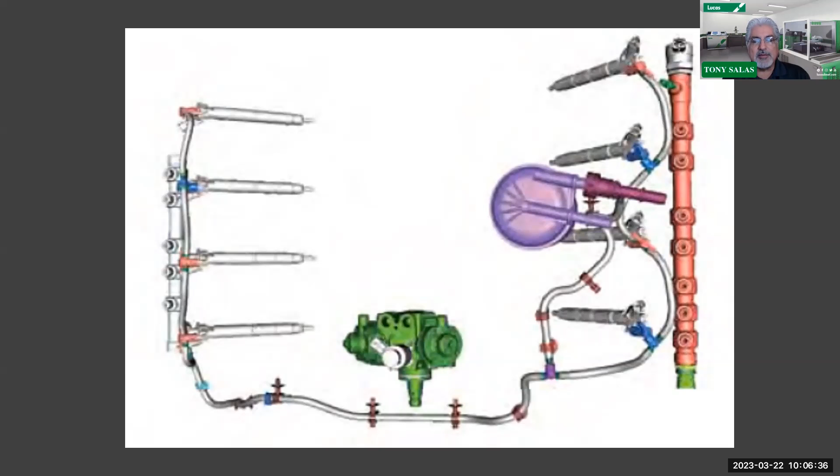So even though we can read the pressures, or depending on the system you got, or you have a low pressure switch there like these Power Stroke 6.7s have, it's still a good idea to always do a volume test, again using the roundabout number of 1 liter in 30 seconds. So if I get very low volume, that could mean I got a restriction somewhere, or I might have a pump problem as well.

So as we look at your later models, you're going to see that the fuel filter itself now has 3 tubes sticking out of it on the 6.7, because one of them is actually the return off the injector. So they modified and changed it on these applications, and that return is also going back.

So the question begs, if I get the system coming in and I got a rail pressure problem, like we mentioned at the beginning of this presentation, the number one thing you've got to always figure out is: is this system grenaded, or is it contaminated? Because many of us will find they're contaminated, but they could also have some contamination and yet still work.

So I'm advocating, I've always done this on these Power Stroke 6.7s, I like to get to the pressure control, which they call the FRPR on the Duramax, but on the Ford it's your pressure control valve right there on the back side of that driver's side rail. So yeah, I'll take the inner fender well off, and I will go ahead and put it in the container and crank the engine over and see what it spits out.

Because what I'm trying to see is if there is metal contamination there. Definitely want to do that.

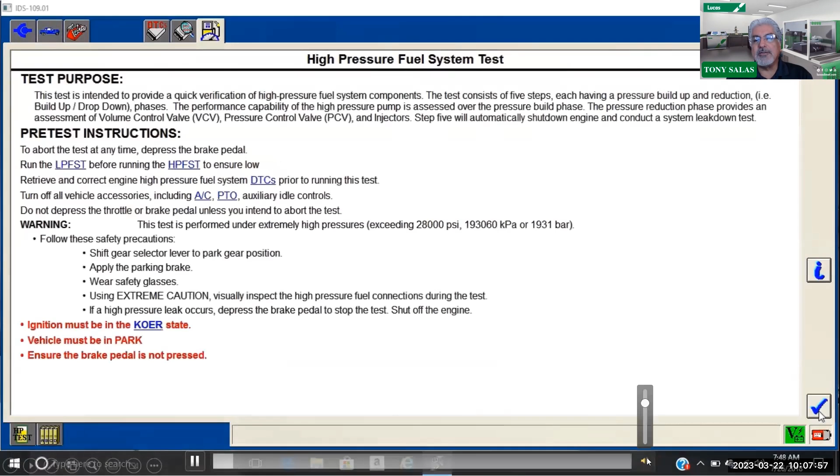Now, I know that Ford software, as you can see right here, actually allows you to do this. I know that if you don't have an IDS, this is what you're missing out on with the Ford IDS scan tool. But in this case, you're going to see the desired and actual rail pressure here.

And in this case, we see the desired, but I like to pay attention to the duty cycles of the PCV, pressure control valve, and the volume control valve. I watch the duty cycles because those two work at all times together for the most part, unless it's on a decel. But in this case, you'll see what we call the ramp up test.

And what it does is it ramps up the pressure. So here you can see the first ramp up test. And then it ramps it up again several times, as you can see here. So watch it here for a second. Desired 4,900 is going to ramp it up. Bang, it takes it up to 29,000. We see if we achieve 29,000.

The one thing I don't like about this and other applications is the fact that it does not simulate real life engine load, because this truck is under no load. It's sitting there in park or neutral. So therefore it doesn't. You still should watch your desired and actual, or commanded and measured, rail pressure when you're driving under a load to see what's going on with them.

Now, what I like about this test though, at the end, as you're going to see, it's going to do a few more ramp ups. And what's going to happen is, at the end of this test, it's actually going to shut off the engine, but it's going to hold the pressure to see if there's leakage. That means it's going to test the integrity of the injection system, but also the pressure control valve and the volume control valve. And that's what you're doing here.

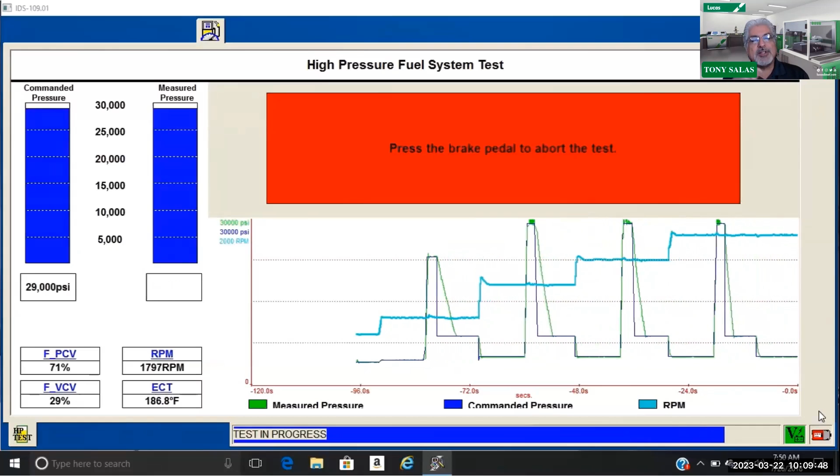So make a note, it is a good test when it comes to checking for rate of decay or leakage that can happen when you shut off the truck. So let me wait for it here, you're going to see the results and see what's going on. And by the way, you'll notice my engine coolant temperature is above 185. Always do these tests if you can above 180, 185, at operating temperature.

So here you can see it's holding the pressure. See that? So it's watching for rate of decay. And then it'll tell you if it passed or failed. So there's your pass, there's your minimums and maximum, and there it tells you if it passed or failed there.

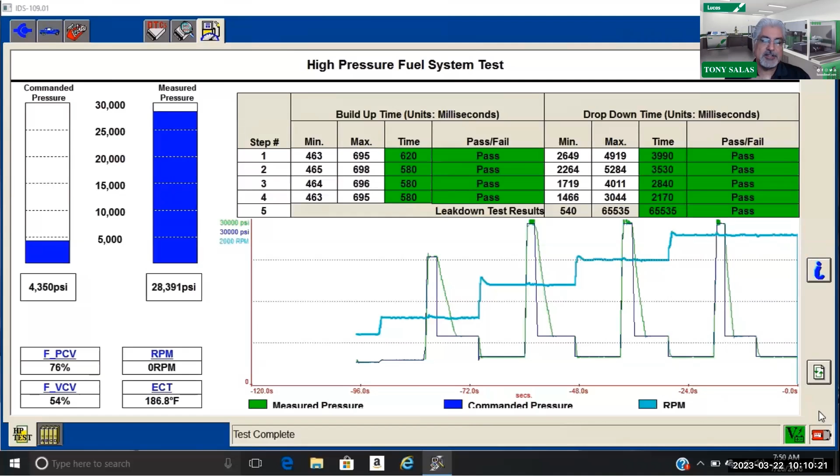So that's one good thing about these Power Stroke 6.7, you should perform using their software there. Unfortunately, when I connect my Snap-on Zeus scan tool and other scan tools, they do not give you this. But if your scan tool does this, great. In this case, it's a good idea to test especially for leakage from that PCV and VCV, like I said already.

Now, this should be an old thing, but I have heard guys call me up where there was a problem with the rail. So I guess me putting this out there, like in previous presentations, is always look for bulletins, what's going on with bulletins on these common rail systems.

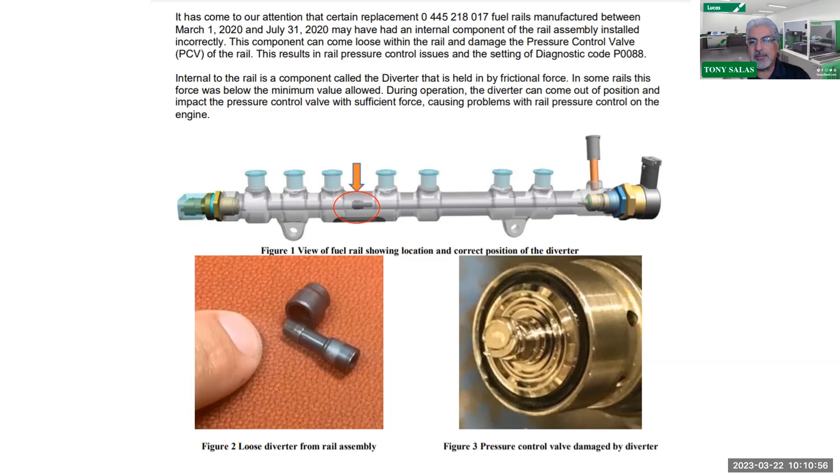So in this case, this is an old one for the 6.7 Power Strokes, where the internals of that orifice, or diverters as they like to call it, can actually come apart. That's another reason why I also like to take that pressure control valve off, because I'm also inspecting for damage, and not only damage, but also contamination as well. So please note there was a bulletin on that as well, telling you what part numbers were bad. A lot of you know this already, some of you don't, but just note it's a good thing to take those off and inspect them.

Now, I know that if you're dealing with a Power Stroke 6.7, and we talked about in the drivability roundtable already about the standardized pump that is now marketed by S&S.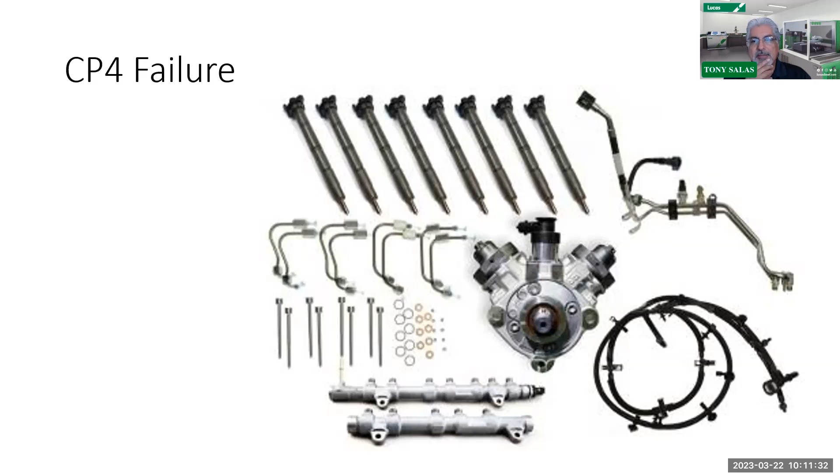You may be prone to want to put in an aftermarket pump, or a CP3 type pump. Just understand these CP4s are designed to work with the high pressure they're designed for. I've talked to a lot of different shops and people, and I get mixed results—some say we're seeing less CP4 failure, while others say they still see a steady amount of failure.

The one thing I can tell you, repeating what I said in the roundtable, is that the weakness of the CP4 is low lift pump pressure and volume. If compression is leaking in, it causes a drivability problem—some fleet trucks keep driving even though they're sputtering, until they run them into the ground. So if there's compression leaking, it aerates the system, and one of the weaknesses of these CP4 pumps is air. We don't want to see air, because it can destroy the CP4 pump.

So please note, the number one thing we tell guys from a service standpoint: when you change the fuel filters on a Powerstroke 6.7 or a Duramax, it's a good idea to let it idle for at least 15 minutes afterward, to work all the air out of it. That will minimize or lower the amount of air that can hurt the CP4 pump.

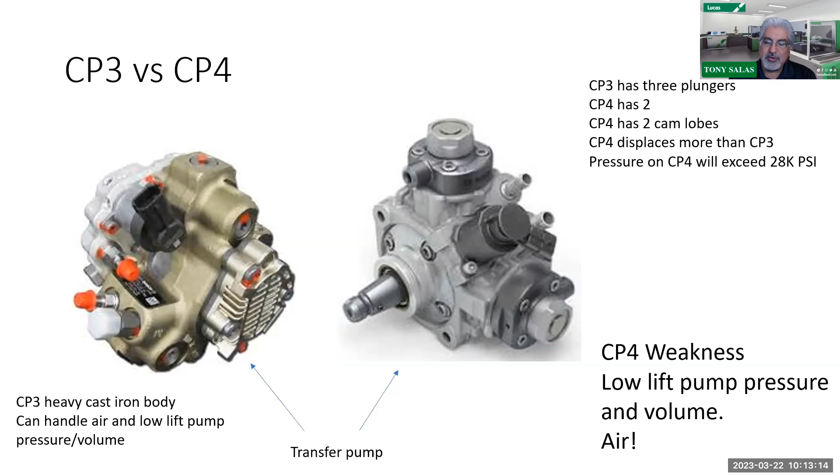I'll say this again—for the trucks I've got, I just serviced one of my fleet customers. He's got 168,000 miles and still has the same CP4. It's a 2011 truck, no issues. I tend to follow those procedures. So have we seen a whole bunch of CP4 failures lately? Nope, I haven't seen a whole bunch lately. Just keep that in mind.

For those of you that still insist on using the CP3, go ahead, whatever you want to do. But remember, the CP3 strokes 3 different times for 1 revolution. Like I've said before, there's a cam that strokes twice on each of these cam lobes, so it strokes 4 times per revolution versus the 3 times of the CP3. If there's a real pressure issue, we tend to do some cheating things, but for being professional about this, I could tell you my Mickey Mouse ways, but I don't want to teach bad habits. In this case, your best friend is probably the cap.

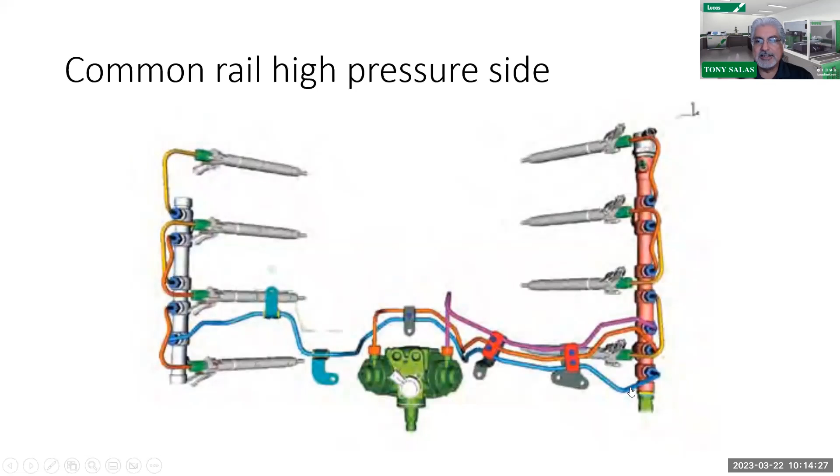The reason you want to do a cap test—note that every time you do one, you'll have to buy a set of lines, because once you remove these lines, according to Ford, you're not supposed to reuse them. So it's just going to cost money to do that diagnosis. You want a cap. The line going between one rail and the other, one rail feeds the other—that's the one where you can isolate a whole group. But you're actually going to cause integrity issues with the line, so capping off one at a time is probably your best bet.

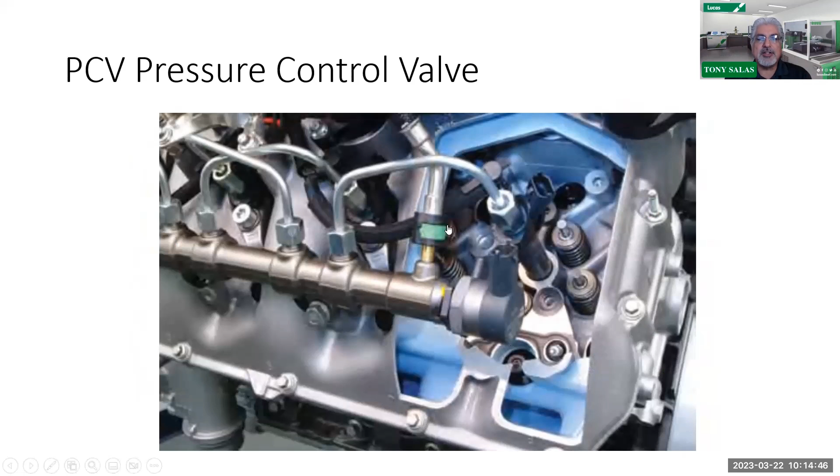For those of you new to this, I can tell you cheat ways, but that's off the record. So there's that pressure control valve I was showing you—is there a volume test you can do off of it? Yes, there is. You can disconnect this, cap it off, and actually test the total volume coming out of it under a cranking event. There are specifications provided for that, so keep a note of it. You can definitely look at that.

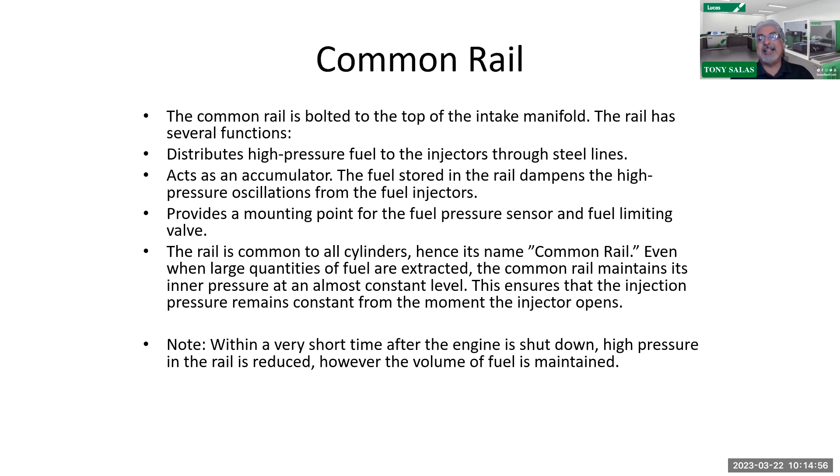To stick to the basics here on the common rail—obviously there's more in-depth stuff to talk about, but that's what we need to cover when dealing with common rail. Like I showed you already, here you can see an example of a graphing that we actually have.

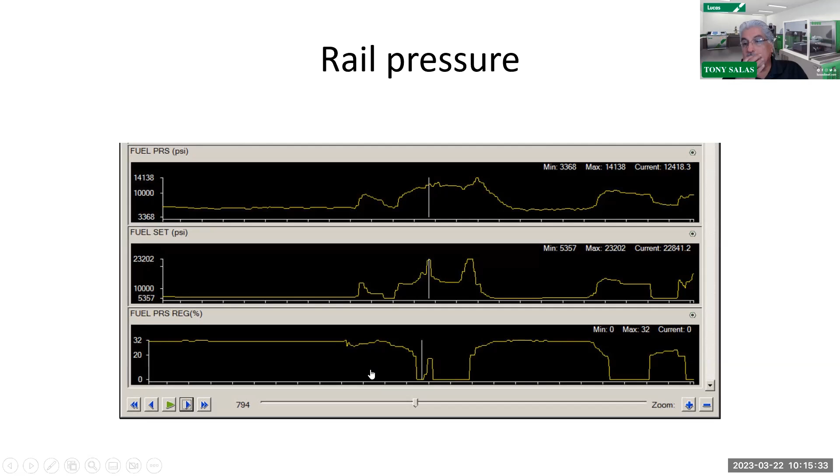So here you can see the fuel rail pressure, the set point, the desired, of the rail pressure, and then what is the actual percentage of duty cycle that you're going to see there. On the average, when it was stable, you can see the pressure stable, we were running around the 30 percentile, like I told you already. So therefore, it does work, and you definitely want to pay attention to that when you test. You could see it also on your scan tool data as well.

So what have been the issues that we've seen? Well, the number one issue we've seen is number 4 injector. Some people are telling me number 5, but we've seen number 4. Map sensor - you see probably the carbon, now they're selling a spacer you can put on the map sensor. And obviously the big one, which is the fuel rail pressure sensor. And that doesn't even cover the lift pump along with the actual fuel pump driver control module. So that's another one there.

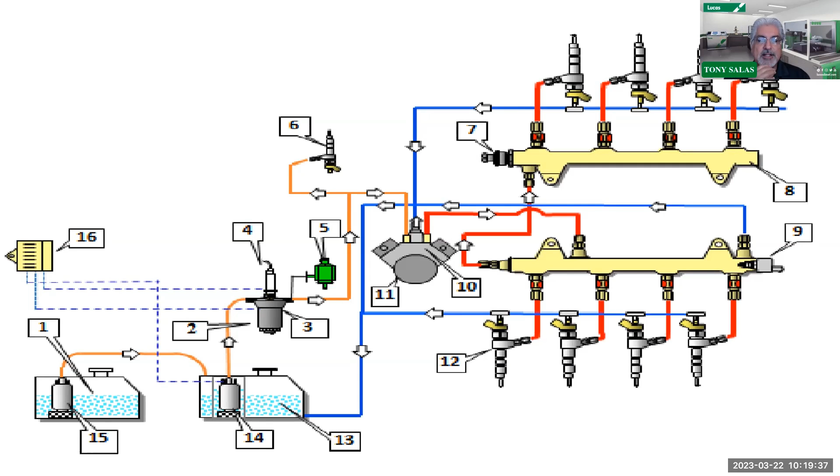There are diagnoses that GM does provide and codes that help you with it. But it's given us a headache, especially on those trucks that have been deleted. Those are the nightmare ones I've dealt with too, so be aware of that. Definitely get up to speed on those L5Ps because those are the ones that are going to give you a headache. Look out for these other issues that can be causing fuel injector quantity and fuel injector timing codes, because they can be a nightmare there.

Hopefully that helps. Now do me a favor: if you're not fluent in electrical and wiring diagrams, you might think this is a sales pitch, but it's not, it's the sincere truth. When guys want to do back probing, when they want to do testing, they're on the phone driving me crazy. Those guys I deal with here, this group I'm training right now in Vegas, oh my God. Even the feedback I get from the guys in the Diesel Master course, we got a lot of issues there. So get to know this.

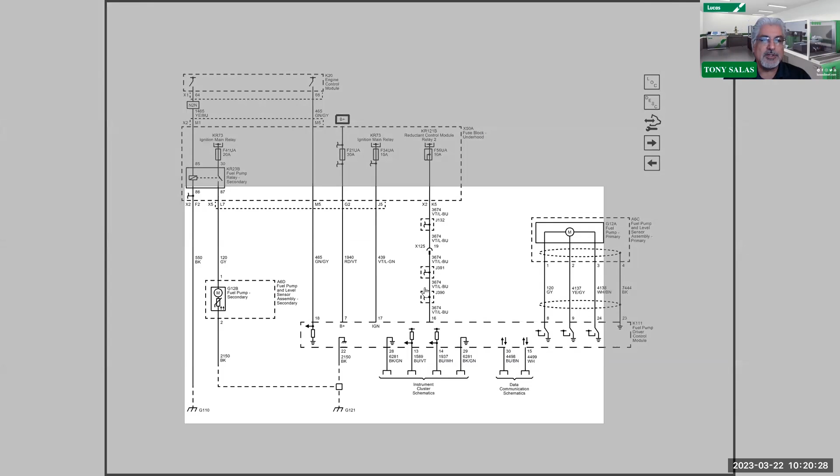What I'm trying to show, like I've shown before, is you've got to have a signal coming from the ECM to enable that lift pump, which is at pin 18, cavity 18, and then there's your 3 phases going to the pump itself. That's a whole different subject I can't cover today, but we have recorded that, so we do talk about it. Pay attention to that.

So what I'm trying to say, and again it's not a sales pitch for training, but it's the truth, is you've got to get up to date on these wiring diagrams and electrical training, how to do that test. So pay attention to that.

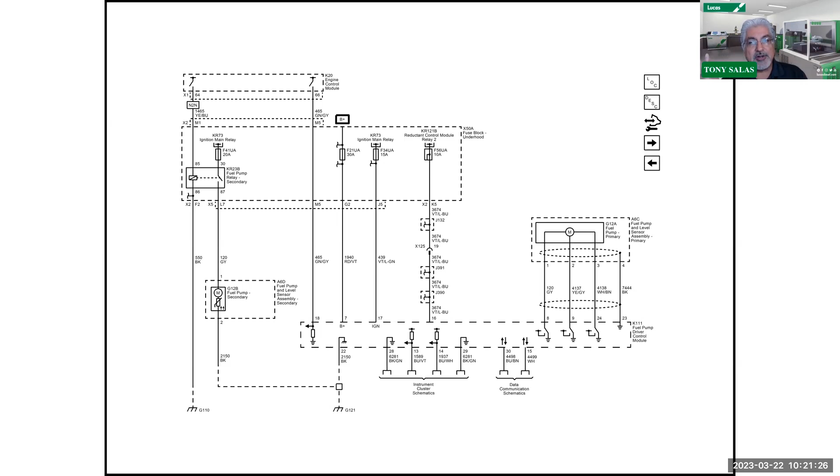Mr. David, are you there? Yep, I'm here, I just had to find where my mouse was, my pointer, to unmute so everybody can see me.

Tony, once again, wow, a lot of really good information. Even though for me, for example, I don't necessarily work on the vehicles, it's super interesting, and all the pointers that you give, wow. Really appreciate that. Thank you, sir, thank you.

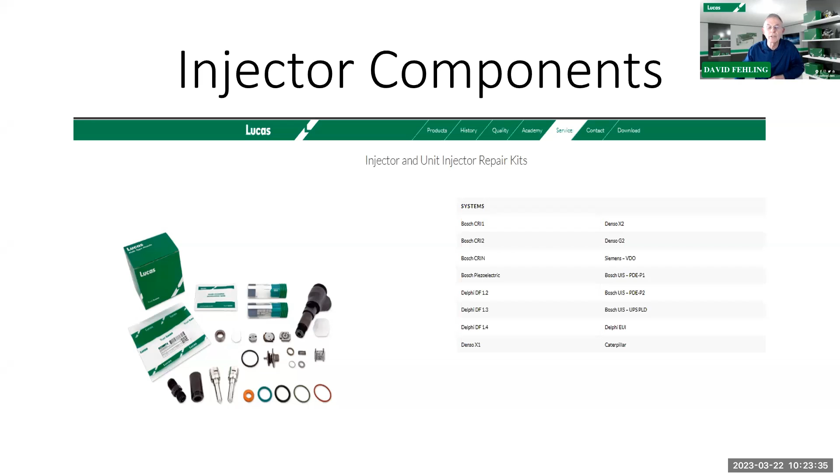As you can see here from the diagram on the left, we have the bodies, the nozzles, the seals, O-rings, springs, you name it. We have all of these components for all the major brands of common rail injectors out there in the marketplace. And as I said a few minutes ago, we also offer all the common rail pump parts for all the major brands.

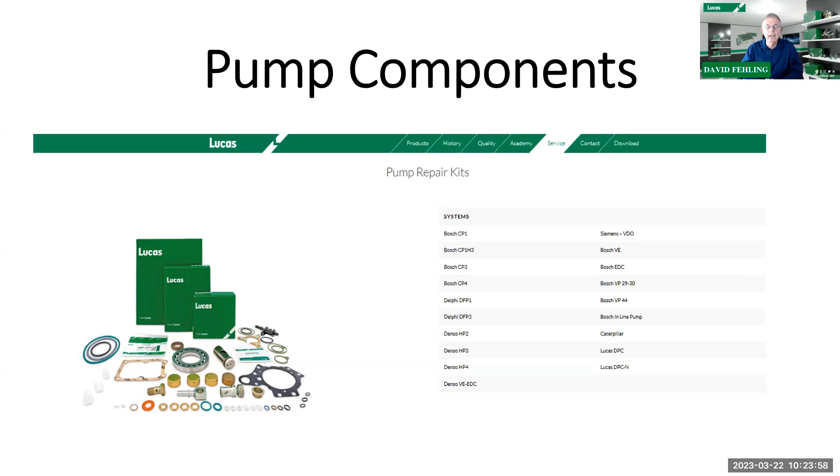So not only do we offer the parts, but we offer the training in order for you to be able to use all of these parts correctly and assemble the components into one unit. And in addition to that, we also offer the test equipment. So we offer the complete package of training, parts, and test equipment.

So we offer single and multi-injector machines, multi-brand as well. In other words, they'll do all the different brands, whether it's the Bosches, the Densos, or the Delphis. And we offer multiple settings for you to achieve the maximum performance of the injector. We'll test electromagnetic injectors as well as piezo injectors. So long story short, we offer test equipment for the entire range of all the common rail systems out there at the present time in the marketplace.